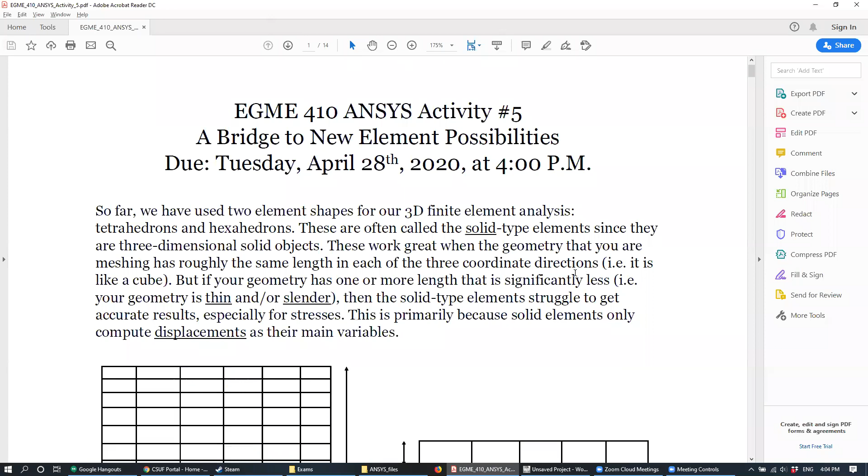Okay, so here's the PDF that's uploaded on Titanium right now. You should be able to download this. I've uploaded a CAD file that we're going to use for the activity today too. So this first part introduces the idea of shell and beam elements, which are the theme for today, and why you would want to use them. And then from there we'll launch into the activity. Okay.

Okay, so let me go over this first part. We talk a lot about the kinds of elements you should use in your finite element analysis. For most of the 3D simulations we've talked about, we've basically only had 2 options: tetrahedrons and hexahedrons. I've drawn those many times, so you know what they look like, and on Tuesday we went over the different properties of each.

One thing I haven't talked about is that these elements both belong to a certain class called solid type elements, because they're basically three-dimensional solid objects. A tetrahedron is a four-sided pyramid, and a hexahedron is just a brick, basically a six-sided box.

These work great for a lot of the cases we've seen, where the geometry has roughly the same length scales in each of the three coordinates. Because these are three-dimensional objects, it helps if your object is also relatively three-dimensional, meaning it has some appreciable length in the X, Y, and Z directions.

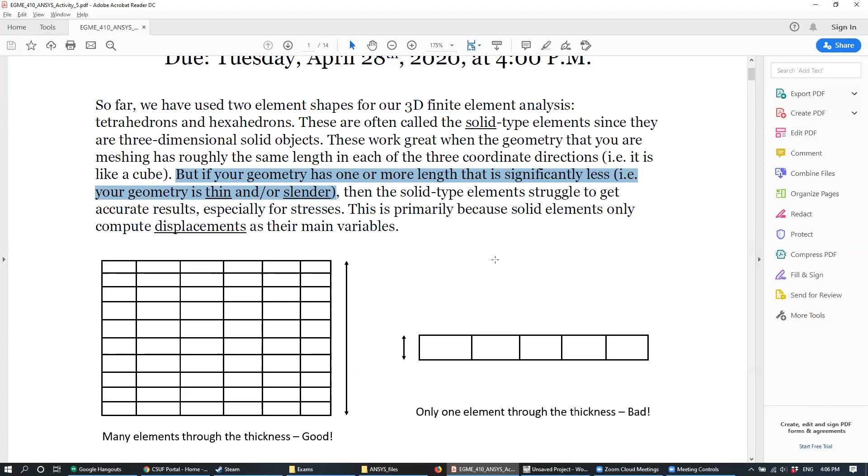If you think of a thin plate, you can think of the width and the height of the plate, but when you look at the thickness, it's actually really, really small compared to the length and the width. So for these kinds of special geometries, which happen quite a lot in our work, solid elements will really struggle.

To give you an example, I have two cases here. On the left, we have a relatively thick member, so it has the same dimensions in both directions. This is a 2D case.

Because of that, we're able to pack a really good mesh density in here. We have about 6 elements across, and then about 10 elements through the thickness. Whenever you have multiple elements through your length, that's always a good thing, because it leads to really accurate results.

But on the right, we have the opposite case where our geometry is really thin. While we're able to get 5 elements across going left to right, going up to down we only have just 1 element thickness there.

This is usually a pretty big indicator, something people look at when reviewing your meshes. If you have parts of your model where you only have 1 element thick, this is usually a bad thing, because it usually leads to some pretty poor accuracy.

The reason for that is, if this represents the extremities of your model, you're basically applying boundary conditions on the upper and bottom surfaces. Even if you don't do it explicitly with a load or constraint, you're doing it implicitly too, because if you don't apply any load or constraint on the top and bottom, it's implicitly assumed those surfaces are stress-free, meaning a pressure value of 0.

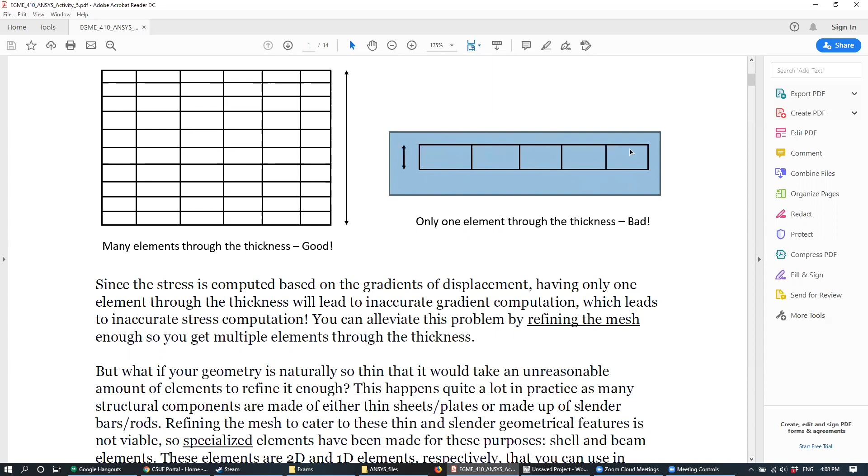So when you have boundary conditions applied on the top and bottom, there's really no room for this to vary or be free. That's why when you only have 1 element through the thickness, this can lead to pretty poor results.

So we know that having only 1 element through the thickness is pretty bad. But a lot of times you can't really help it, because of the geometries you're given in your model, either you use some kind of plate or thin, slender rods. It's so thin that if you try to refine the mesh enough to pack more elements in there, you end up with a mesh that's unreasonably expensive. Especially if you're using the student or academic version of Ansys, you'll quickly run up your element count or node count, and then Ansys won't even try to solve your problem.

So for those of you who are working with these kinds of geometries in your projects and have been struggling to mesh, I've spoken to a few of you, you'll notice it's a big pain to try to deal with these thin and slender geometries.

The good thing is, we're not the first ones to discover this. People have been struggling with this in finite elements for many years. So specialized element types have been created for these purposes, and those element types are shell and beam elements. What's special about these element types is that they're really specialized for these kinds of geometries.

A shell, if you think of like a shell on a snail or something, is something that's really thin, but really wide and really long. So it basically has only 1 dimension that's really thin or small compared to the others. That's essentially going to be a 2D structure. So instead of trying to put a 3D solid element there, we can replace it with a specialized 2D element, which is our shell element. Then the other specialized element type we'll go over are beam elements.

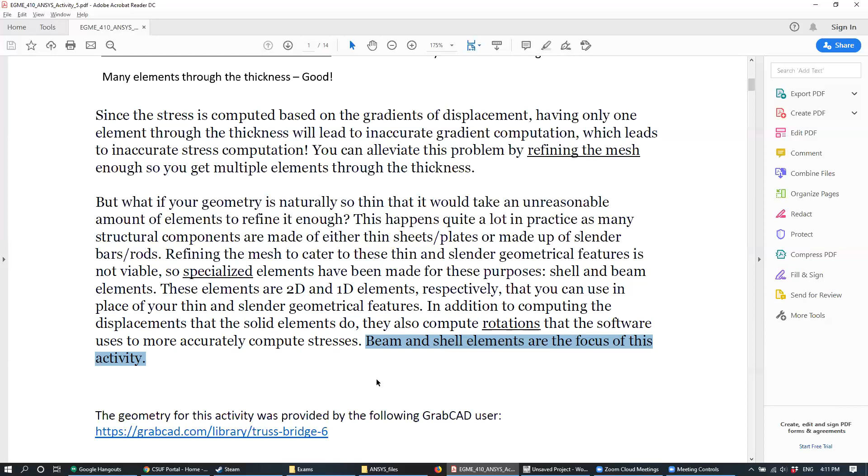So in this activity, what we're going to be doing is learning how to incorporate beam and shell elements in Ansys in order to perform this kind of analysis. And the geometry I picked out, which I've gotten from GrabCAD, I've linked the specific source, is this bridge geometry.

If you notice from this bridge, all the geometrical features here can either be a shell or a beam. So we don't have anything where it's like a solid block of material where all 3 length scales are kind of the same.

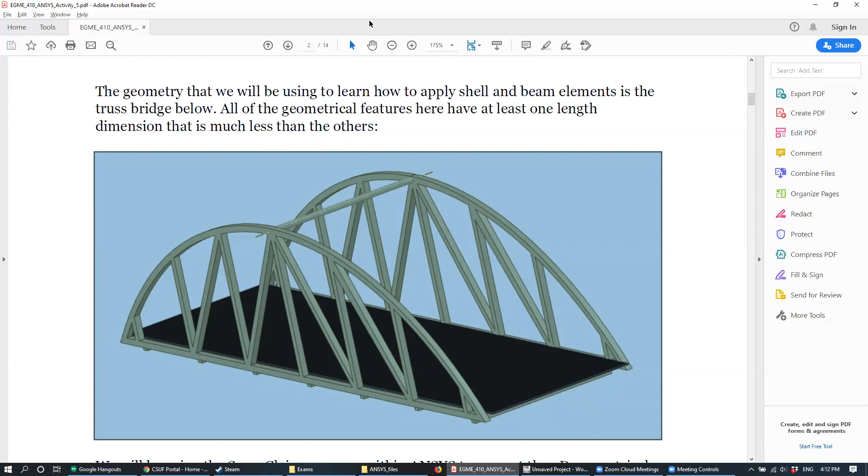For instance, if you look at this rod at the top here, that rod is really long, but it's not really wide and not really high, so we're going to replace that with a beam element. Similarly, if you look at the road, they actually modeled the road in this CAD. This road is basically like a thin plate, really long in this dimension and really wide in that dimension. But if you look at the thickness, in that direction it's really small. So this is the perfect candidate that we can use shell elements for.

So even though I call this an Ansys activity, it's really going to be a SpaceClaim activity because we're going to spend the majority of our time in SpaceClaim.

So what we're going to be doing is learning how to modify 3D geometries within SpaceClaim and replace things with shells and beams.

Okay, so I know I've kind of put some disrespect on SpaceClaim at other times this semester because I didn't know it had these capabilities. So please forgive me, SpaceClaim. You're not as useless as I thought you were. You're actually pretty good for these kinds of things.

Okay, so a summary of the new things we're going to do: first, learn how to open up a geometry in SpaceClaim. Next, learn how to create shells using what's called a midsection operation, which I'll explain when we get to it. Then we'll use an extract operation to get beam geometries from slender segments with constant cross section. Part four, where we'll spend the majority of our time, is learning how to clean up our new geometry in SpaceClaim, which will be quite a process. Finally, in Ansys we'll learn how to make manual connections, which will be important as we fiddle with the geometry.

Oh cool, so Chris says you can create 2D structures in SpaceClaim from internet images. That's pretty cool, I'll have to look into that later on.

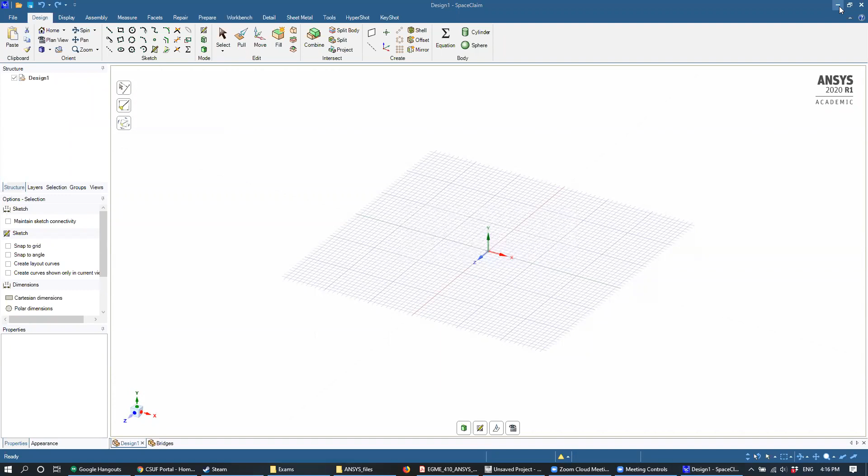Basically we're going to be modifying our geometry in SpaceClaim. Once you've imported it the same way we've always done—right-click geometry from the workbench, import your geometry—the file I've uploaded onto Titanium should be called truss bridge geometry. Once downloaded, import it by right-clicking geometry here, going to import, and browsing for the file wherever you downloaded it. Then right-click that geometry and click the button that says Edit Geometry in SpaceClaim. Before we've edited geometries in Design Modeler, but this time we're going to edit it in SpaceClaim, because SpaceClaim has some really nice features that will allow us to create shell and beam elements.

Okay, so once you've opened up SpaceClaim, you should see something that looks like this. Here's our geometry, which you can examine just as if it were in SolidWorks—I think this was created in SolidWorks first. You can see here we have a typical bridge with the supporting sides of the bridge, the road in black, and all the supporting beams.

So we're going to be using shell and beam operations to basically transform this bridge into something that we can actually analyze. Okay. So the first thing that we're going to do is we're going to basically repair the geometry, right? So luckily for this activity, this geometry is already coming in pretty clean. The person who did this did a pretty good job in making sure everything was filled in and stuff like that. But if you're working with either your own CAD or some CAD that you got somewhere on the internet, you want to make sure that you start with basically as clean a geometry as you can.

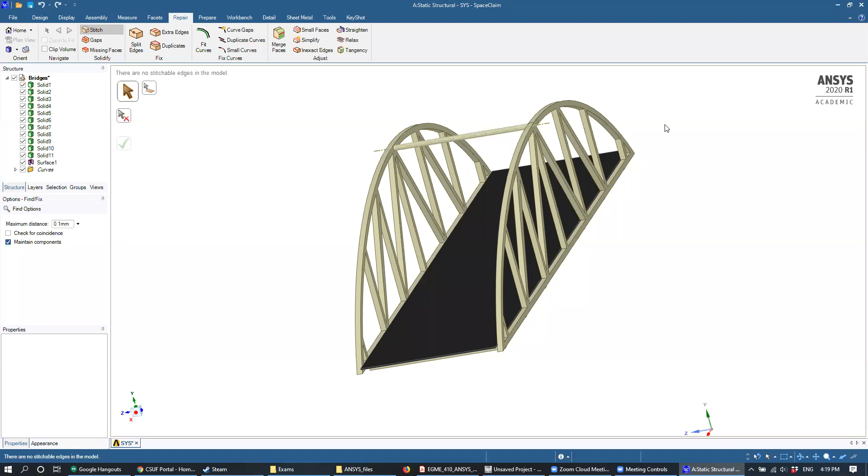Okay. So the top cylinder has a gap between the supporting arcs. Oh, interesting. Did that show up when you did the stitch? Okay. Yeah, we'll fix that later. Small gaps like that we'll fix after we do some beam stuff. But this is more talking about, you know, if you have hollowed out edges and stuff like that.

Oh, I see what you mean. Yeah, there's a small gap right here. Usually that's okay. If you have things that are intersecting with each other, that's what Stitch will look for. Or if you have solids that are hollow, because that'll cause an issue too. But small gaps like this, we'll fix it up later. Yeah, good observation.

Okay. Yeah, SpaceClaim can be a bit slow to load up. So if you're waiting for SpaceClaim, definitely let me know.

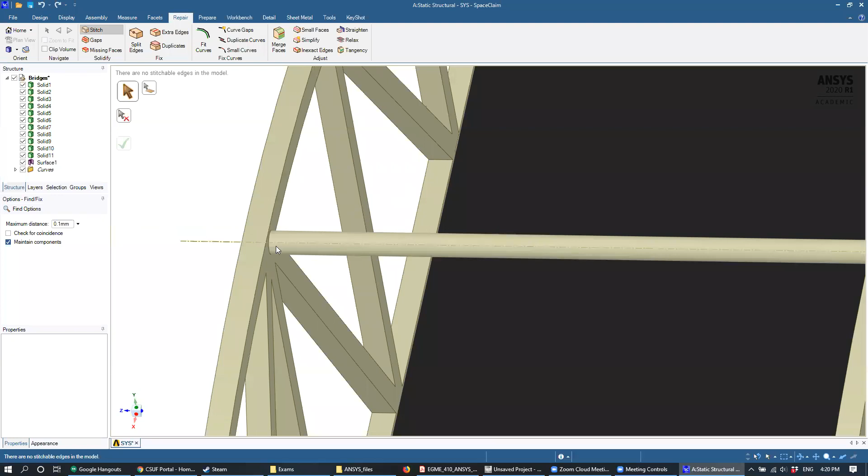Okay. So when you open up SpaceClaim, your geometry is going to be loaded up right here. The first thing that we want to do is make sure that we're starting out with as clean a geometry as we can. SpaceClaim has some nice automatic features that let you do that. So our first step will be going to the Repair tab, which is in the top left here. And then from the Repair tab, you're going to click Stitch.

So Stitch is going to look for any areas where it detects some kind of dubious geometry that's going to cause us problems down the line, mostly with meshing, and then it's going to attempt to automatically correct that. A lot of the cases where Stitch will find issues are if you have two solid parts that are running into each other and overlapping. In those cases, that can cause a lot of issues with meshing, so Stitch will try to clean that up.

And so the next thing that we're going to do is click Gaps right here. Gaps is a similar thing where it tries to detect some kind of inaccuracies in the model. Okay. So in this case, we found something, right? When we click Gaps, we see that we have this small edge right here.

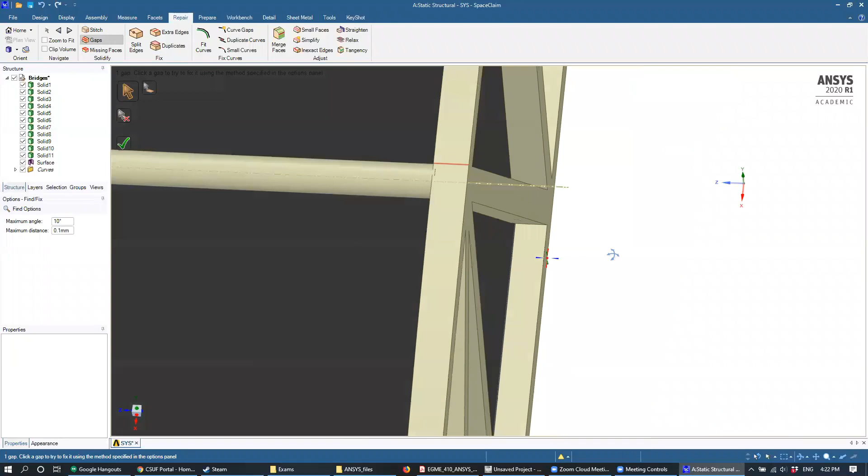So that can be fixed. So then let's go ahead and fix that. To fix anything that the repair tool finds, we can go ahead and click this green check mark here. Okay. So in this case, it says no problem areas were fixed, but that's okay because I know that this geometry will work out.

But normally, when you click this repair tab and you go and click these things, they'll actually go and fix some stuff. But in this case, we're starting out with a pretty clean CAD file, so there's not much for us to do. But in the case that you weren't, these are just some of the automatic tools that SpaceClaim will have to kind of help you out.

Okay. Any questions on this, or are people still kind of catching up a little bit? Okay.

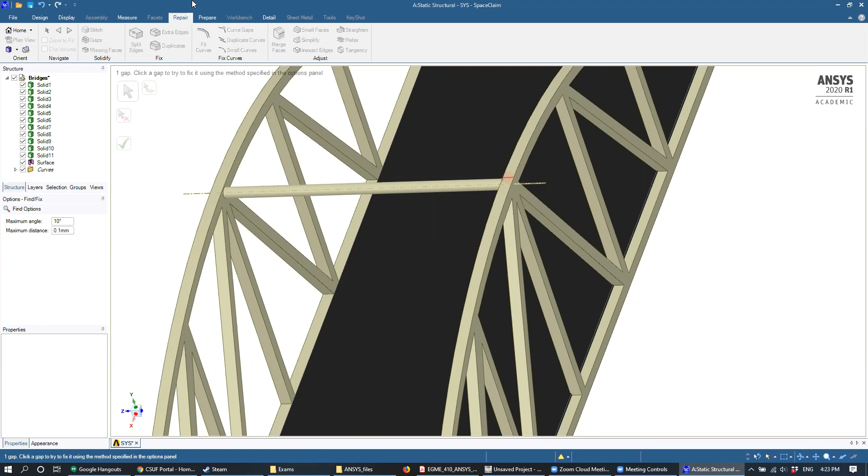So now that we've cleaned up our model, or at least we tried our best to clean up the model, now we can actually start to create our shell elements. To do that, we're going to go to the next tab over, Prepare. Prepare basically gives you a lot of tools for modifying your geometry to make it easier to work with later.

So the first tool that we're going to use is called the midsurface tool. The midsection or mid-surface tool is given by this button right here. After you click Prepare, you can click mid-surface. What this will do is allow you to select places in your model where you want to make shells. Basically any geometry which is relatively thin but has a good length and width, we can turn into a shell.

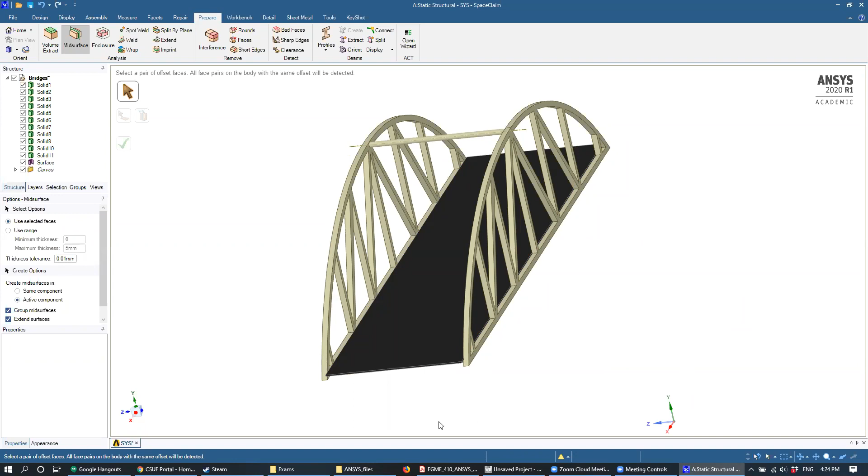So in this particular case, there are three locations where I'm going to create a shell. The first one that's pretty obvious is going to be the road right here. The road is literally a really thin plate, at least the way it's modeled here. So let's turn this road into a shell, because right now this road is technically a three-dimensional object, so you can see it has some thickness, but it's extremely small.

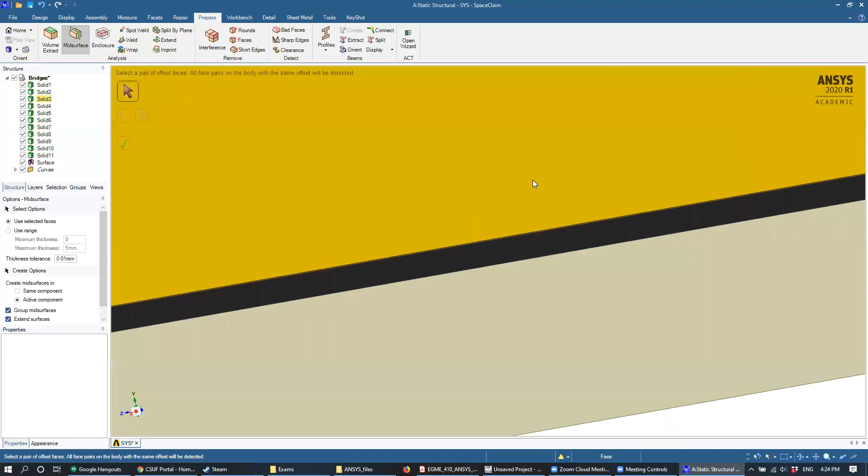So like we talked about before, when you have these three-dimensional objects that are actually really thin, the best thing to do would be to simply replace it with a two-dimensional object. So let's go ahead and do that. After you click mid-surface, you'll see that some surfaces will highlight in yellow when you mouse over them. So let's click the top of the road.

When you click the top of the road, it'll look like nothing happened. But then when you click the road again, what you did was select both sides of the road. You clicked the top of the road first, which selected it and made it invisible. Then you clicked the bottom of the road, which completed the operation.

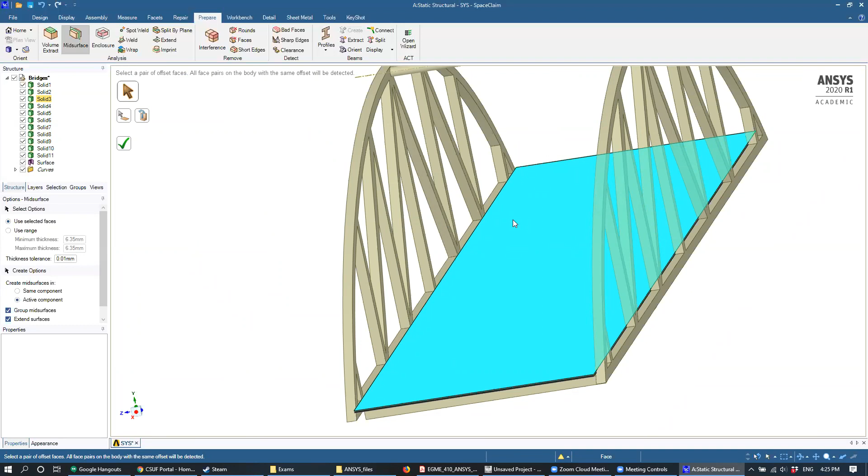What we're telling SpaceClaim here is that these are two planes in our model that are parallel to each other and extremely close. Let's replace these two parallel planes with a shell, because a shell is going to be a lot more convenient. After you've selected the top and the bottom of the road with the mid-surface operation, go ahead and click this green check mark here, and by clicking that, you're going to create your mid-surface.

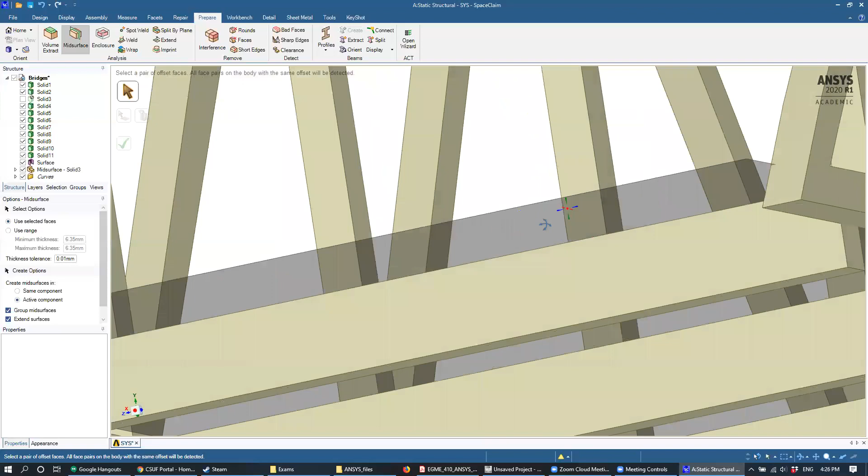After you click the green check mark, you can click anywhere else in your model to deselect it. It's transparent, so it's a little bit hard to see. But we've replaced that black road, which was a three-dimensional object with a tiny bit of thickness, with a two-dimensional object, basically just a rectangle that has no thickness. That's going to be much better for us.

Okay. So was everyone able to create a mid-surface from the road?

Okay, so then now let's continue on with the mid surface, and then let's do it for the sides of the bridge, because these sides of the bridge are also relatively thin, as you can see from right here. So let's go ahead and create mid surfaces there. While we still have the mid surface selected, we're going to click this, and then we're going to click the back side. What you should see is that one side of the bridge will turn blue, and the other side will be green. So let's go ahead and click the check mark.

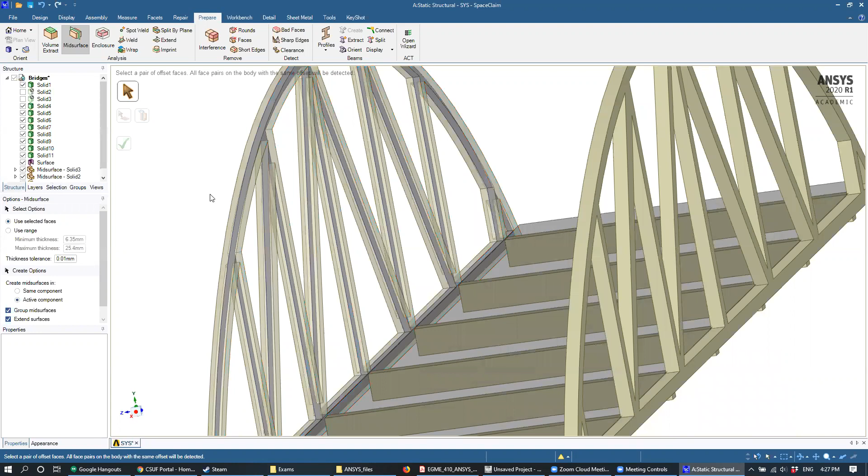Once you click away, you can see that we've replaced the side of the bridge with this mid-surface operation. And then let's do the same for this guy right here. So we'll click once, click twice, green check mark, click away, and you can see now that we've replaced the road and the sides of the bridge with shells. So instead of three-dimensional objects, we replaced them with two-dimensional ones, which have the same shape, but we've eliminated that thinness dimension, which is going to give us trouble later on.

So at this point, you should have three shells in your model, one for the road and one for each of the sides of the bridge. So that's all there is to creating shells. The only requirement for shells is that you have two parallel planes that are next to each other. A lot of your geometries are going to have that kind of feature. So that's for shells.

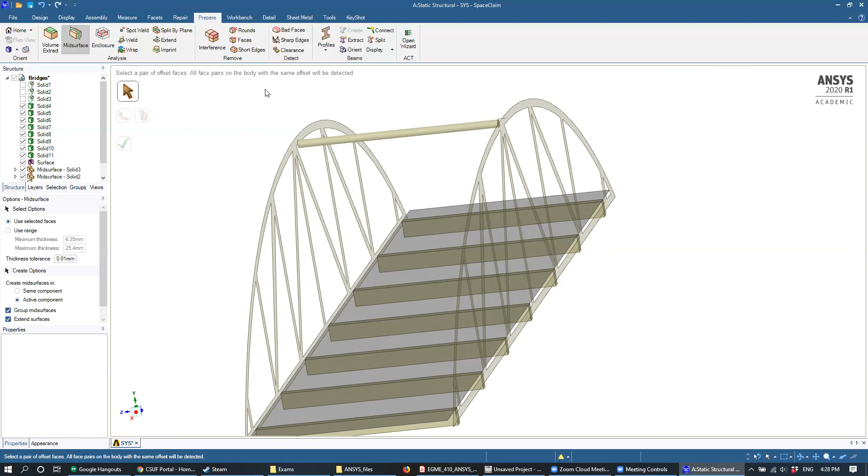So now let's make beams, because we still have some geometries here that we can work on. We have this top beam right here, and we have all these bottom ones. So let's create beams out of these. The tool that we're going to use is this extract feature, still working within the prepare tab. If we go over to the right of the toolbar, this whole section here has to do with beams, but the only tool we're going to use is extract. You can see from the tooltip, extract will create a beam from a solid where the solid has a constant cross section.

So let's click extract right here. Then we're going to mouse over each of these structures and simply left click to create a beam. Let's start with the top here and left click. You can see that solid cylinder has turned into just a one-dimensional line, where that line is our beam. So then let's do that for all the bottom beams too.

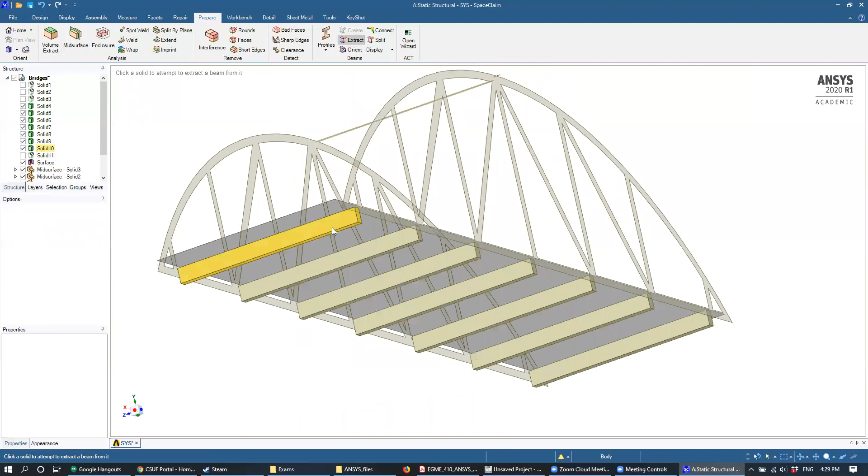All you have to do is make sure you have the extract tool selected, and then click on all of the beams. There should be 8 of them overall: 1 up top, and 7 on the bottom. Let me orient myself. Okay. So we've turned our entire geometries into shells and beams.

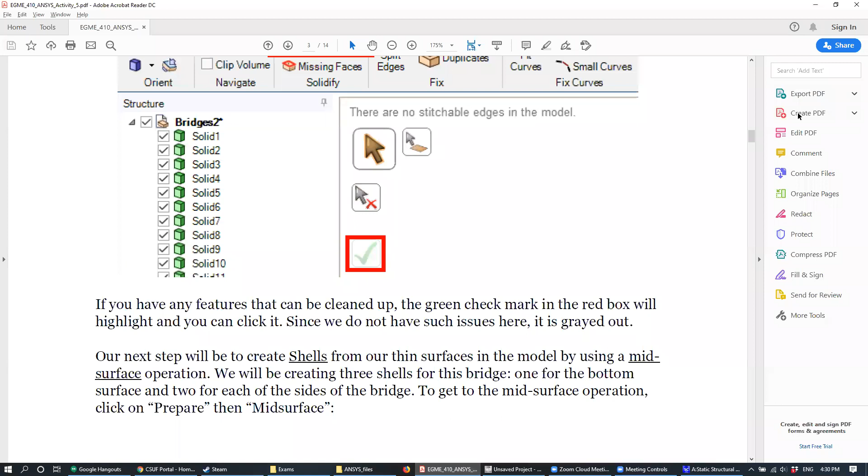So for beams, it's still going to be in the prepare section, just on the right side here. Before we were working on mid surface, and now we're going to work on beams. The button you want is extract right here. Once you click extract, you just click on all the beams in order to create beams out of them.

So now that we've done that, you might think that we're done here, but you would be wrong. We're not done working on this geometry, because if you fly around the model, as people noticed at the beginning, we have some gaps, right? So if we look at this beam right here, let me turn off this guy, not that one, that one.

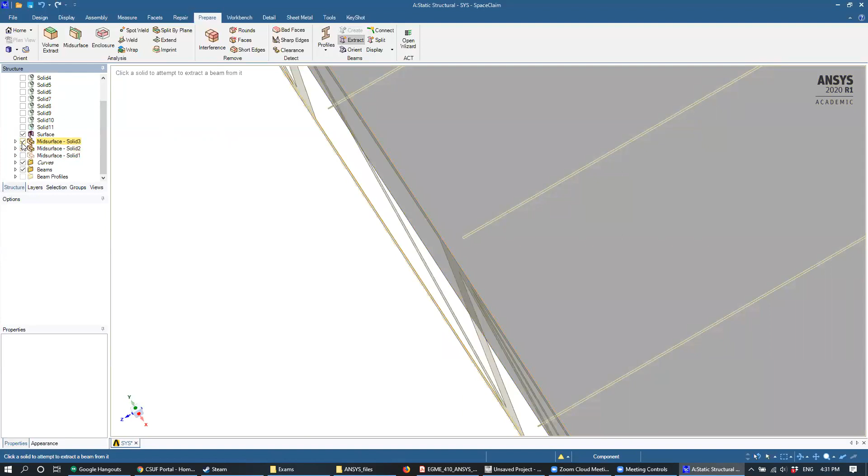So you can hide different parts of your geometry by just clicking the check marks here on the left side. Okay. So you can see right here that this beam is not connected, or there's a gap between this beam and the bridge. So that's going to be a problem because in the three-dimensional geometry, that beam was supposed to be connected there, and it's supposed to help support the bridge from structural failure.

So we need some way to basically connect this beam over to this bridge here. Okay. And you can see that issue kind of persists everywhere in the model, because if you look at the supporting beams on the bottom, like this beam is not connected to the bridge like it should be.

So this happens pretty often when you're creating these shells and beams, because you're replacing a three-dimensional object with a one-dimensional one. There's going to be some gaps that show up just because you're reducing the dimension of some sub features. But not to worry, Ansys SpaceClaim has a tool for this. The tool is called extend. If you read the tooltip here, it says extend will extend surfaces, edges, or sketch curves so that they intersect with bodies.

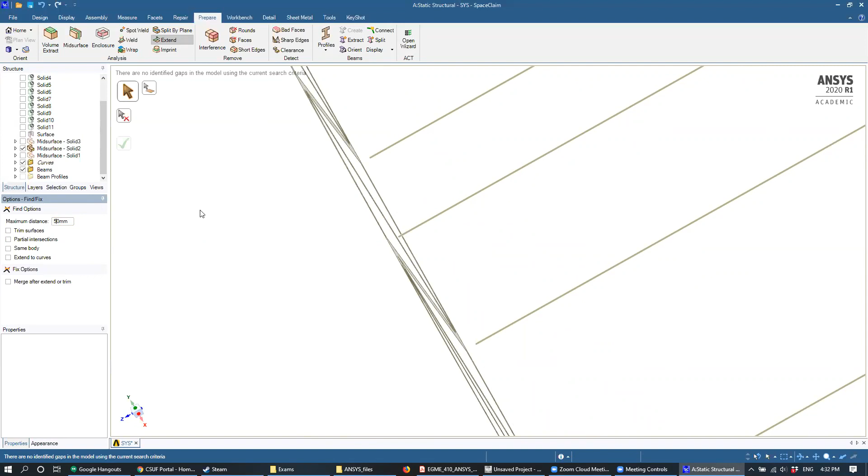So let's go ahead and left click this extend tool. And then what we need to do is raise the tolerance. Because right now it's looking for any gaps that are 10 millimeters or less, and if it can close that gap, it's going to try to do so. But because this is a bridge, it's a fairly big geometry, so we need to up our gap here. So instead of 10 millimeters, let's change it to 50 millimeters. Once you've changed that dimension, you can hit enter.

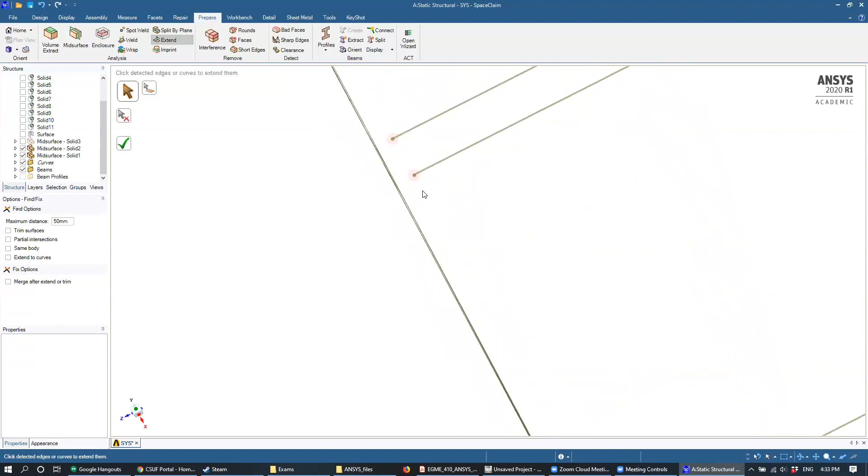Then you should see that SpaceClaim will find places where it can connect. And let's make sure you have both of the bridge sides highlighted. You should find about 8 areas, highlighted in red, where SpaceClaim can connect the beams to the bridge. What SpaceClaim is saying is, hey, I found this curve floating around in no man's land, but if I extend it a little further, it can intersect with something, which is typically what we want. So once you've found the 8 areas indicated at the bottom, click this green check mark to perform the extend operation.

So you can see once we've extended that, this beam is now intersecting with this one. Let's hit the green check mark again, and that's going to connect those beams with the bridge on the left. So now we've extended some of the beams to intersect with the bridge.

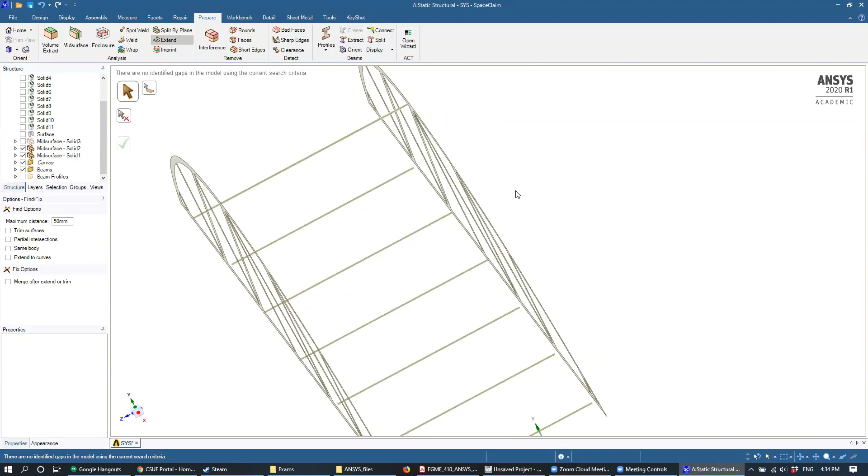Oh, your axis can't spin. Yeah, sometimes it can be really easy to get disoriented here. SpaceClaim is a CAD software, so it's relatively heavy. If it's locked a little bit, maybe give it a little time, and then you can hopefully spin it again. It tends to happen sometimes. And in the worst case, you can always just close the program and start it up again.

Right. Yep. So that's the next thing. Jose brought up a great point. From doing that extend operation, you should only see about half the beams being extended over to the bridge. And if you're having trouble seeing the beams, I basically turned off the road. You can turn the road on and off by clicking this check mark on the left here. My road ended up being solid 3, so I'm going to keep that turned off for now.

So back to Jose's point. Jose noticed that not all the beams were properly connected, right? Even after running the extend operation, we still see a gap right here. And that's not good because we basically can't have any gaps in the model like this.

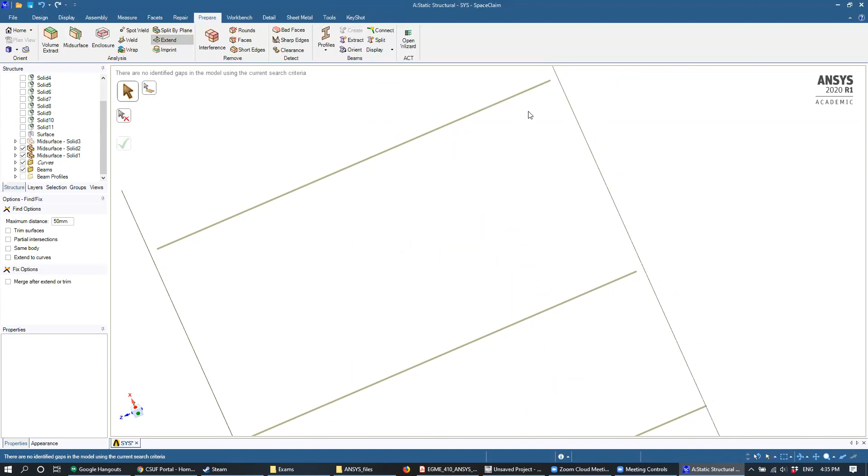And so the reason for this is that these beams are not properly aligned with the bridge. Okay, so let me actually zoom into this view right here. I'm going to basically change the view such that it's centered on the z-axis. And if we zoom in on this beam right here, it's a bit tough to see, but you can see this little gray dot.

So you can see that this gray dot, which represents our beam, is not actually aligned with the bridge. So the extend tool failed because when we extend this, it doesn't actually hit anything. So what we need to do is move this beam up a little bit so that it intersects with this edge. And we need to do that for I think 4 different beams. This part is going to get a little bit tedious, but it's not too bad.

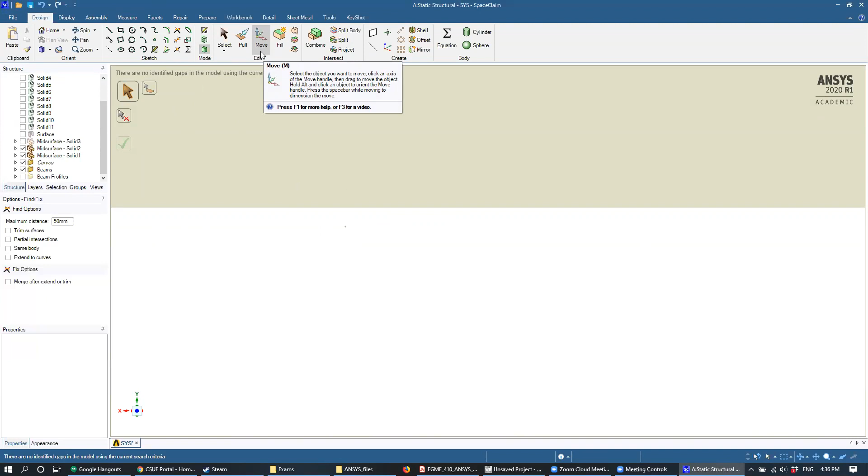So basically what we need to do is move it. We can move certain parts of our geometry from the design tab. If you go to design right here, there will be a move operation that you'll see in the middle here. Once you click this move, you can select certain geometries and drag it up and drag it down, depending on how much you want.

But the problem here is that we don't know how much we want to move it up or down. We can eyeball it as best as we can, but I think the better thing would be to measure it so that we can get a precise number for how much we want to move this up. So in order to get that, we're going to need to use the measure tool. The measure tool is going to be up at the top here. So let's go ahead and click measure. And then we're going to use this measure operator to measure the vertical distance between this beam and this bottom edge.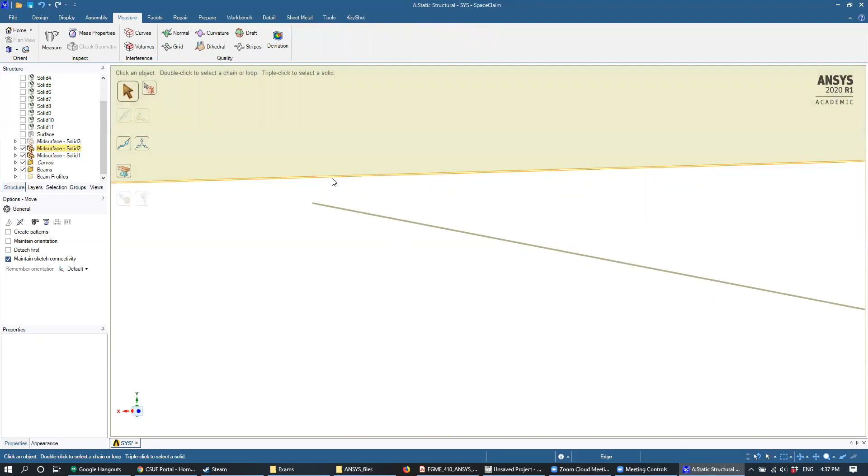So I'll go a bit slow here because it's a lot of operations that we need to do in succession. If you're disoriented from all the zooming and the flying in, it's good to zoom out at this point just to orient yourself. And then we're going to need to focus on just one of the beams. I'm going to focus first on this beam on the edge, where we can see, just by flying around, that this beam is disconnected. So we know that we need to move this beam up so that it can be properly extended.

Right. So Chris's question is: the simplified beams are made by cutting out everything but the center of the cross section, running the complete length. That's correct. So basically, once you click extract, Ansys SpaceClaim looks for something that has a constant cross-sectional area, and replaces that with the line that runs that area. And as a hidden variable, it saves the cross-sectional area just as a number, and some indicator for the shape of the cross section, and it uses that as part of the analysis. But geometrically, it just replaces it with the line that runs the complete length.

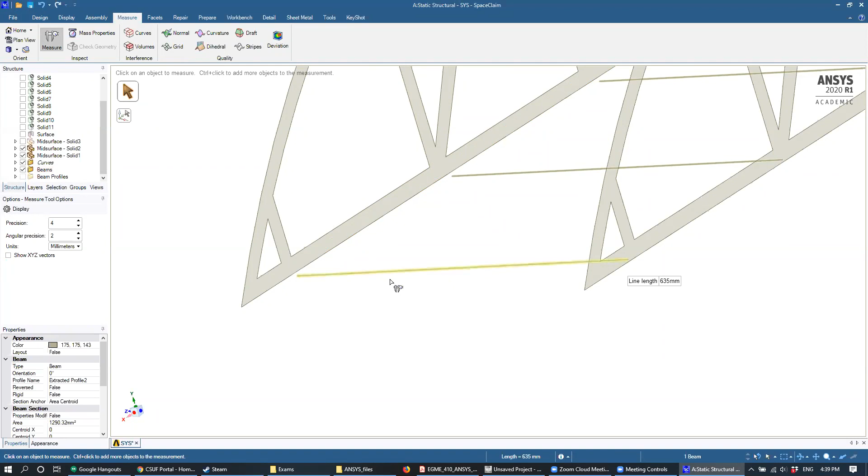Okay, so then let's go and measure this. To measure, we're going to left-click this measure tool right here. This will allow us to measure stuff. If you click measure and then you click the beam, you'll see that the length of the beam is given by 635 millimeters, so that's about 63% of a meter. But what we want is to measure the vertical distance between this beam and the bottom edge of this bridge here.

So you're going to select the beam with your left click, and then hold Control on your keyboard so that you can select multiple objects. Then you're going to left click, and you have to be really precise here, the bottom edge of this bridge right here. What you are seeing right now is the distance between these two. But we don't want just the raw distance, we want the vertical distance. So once you've selected the beam and the bottom edge of the bridge, you're going to go to the left right here and click this option for Show XYZ Vectors.

And then once you do that, you'll be able to see the XYZ distance between these two objects. In this case, what we're looking for is the distance in the Y direction, because the Y direction is the one that's straight up and down here. And we can see that we have a distance of 1.6221 millimeters.

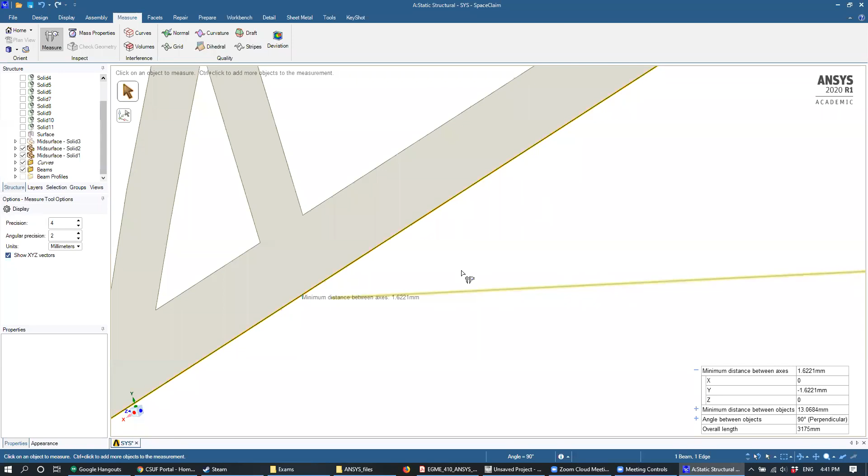So this CAD wasn't as nice as I was talking about earlier. Actually, when I was moving it earlier, I moved it up 0.3 millimeters, so you should have about 1.9221 if you're using the same model or site. That's why we need to use the measure tool, because it's always going to be slightly different.

So now that we have that number in our head, for me that's 1.6221, but for you it might be something different, maybe 1.9. Let's go back to the Design tab. We'll click Design at the top, then click this Move button, which will allow us to move an object.

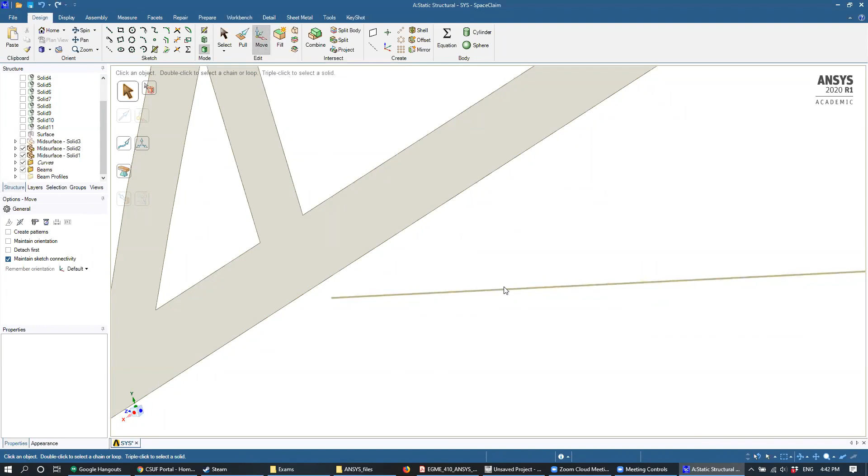Make sure you click some white space to make sure you're not selecting anything else. Once you have the Move tool selected, left click on your beam of choice, and then click the blue arrow to move it up in the Y direction.

What you want to do is move it up just enough so that it intersects with the bridge. You don't want to move it up too much, because that might ruin the point of the beams, which is to rest at the bottom. For me, I know I needed to move it up at least 1.6221, so I'm going to move it up 1.63 millimeters.

Once you've pulled up the blue arrow, you can enter a distance on your keyboard. Once you've entered your distance and hit Enter, you've successfully moved your beam. Go ahead and click on some white space to deselect.

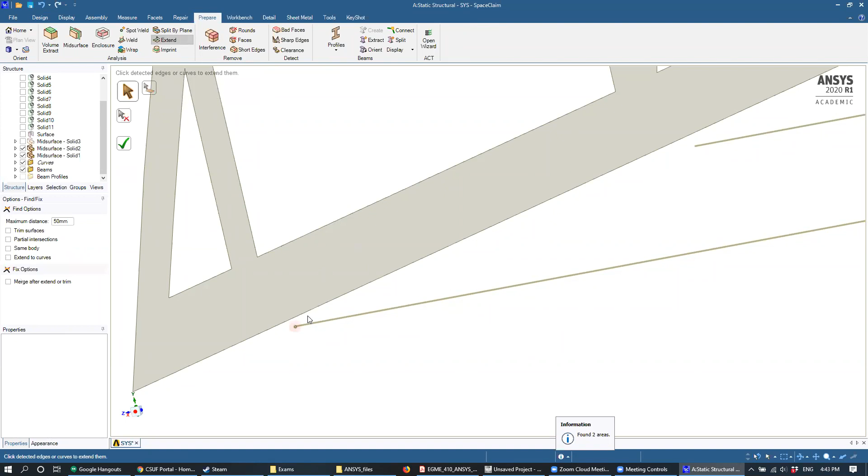Then let's go ahead and run the Extend tool again. Go back to the Prepare tab at the top of Space Claim, and click Extend. If you moved your beam properly within the space of the bridge, you should see that the Extend tool has found two new areas where it can extend a beam to match your bridge, corresponding to the two ends of the beam we just moved. If you run the Extend tool and still don't see these, move your beam up just a tad more.

Once we do that, we can go ahead and click the green check mark, hitting it twice if you have to. Then you can see that this beam is properly intersecting with the bridge, as it should be doing.

I know that was a lot of steps for something that was pretty tedious, so I want to take a second just to catch our breath. So was everyone able to successfully move their beam up and connect it to the bridge?

Okay, all right. Yeah, it's a bit tedious. It's kind of a lot of steps, and a lot of small things, so definitely take your time.

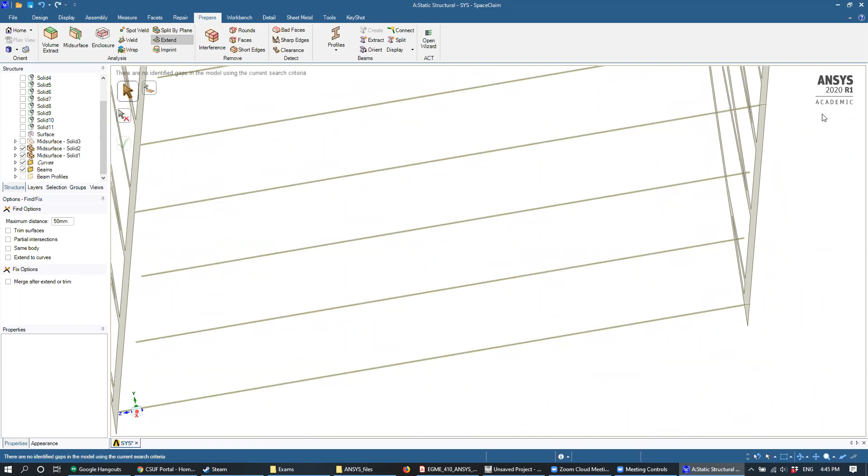Okay, so I'm going to go ahead and do that. I'm going to go a bit faster here, just in the interest of time, but you can kind of see the process from start to finish.

All right, so the first thing is we need to measure. Go ahead and click measure, measure. Click the beam that's not connected, hold Control, and then click the bottom edge right here. So you can see that we have a vertical distance of minus 1.4797, that means I want to move this beam up by 1.48 millimeters.

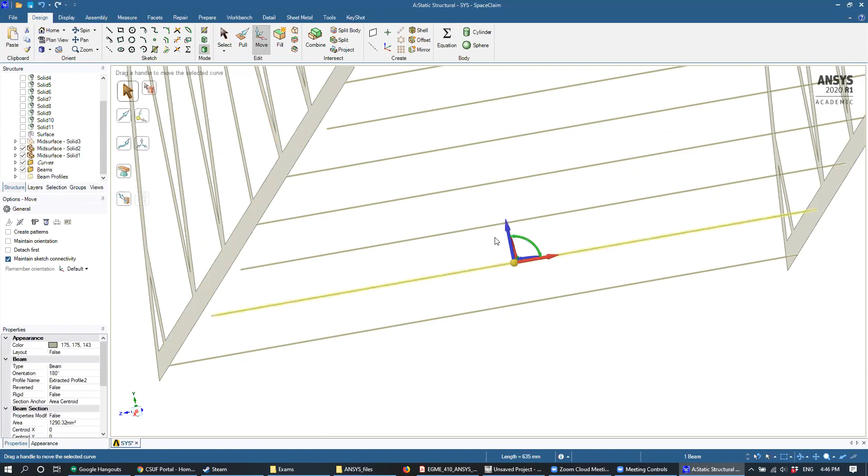Now that I have that number in my head, let's go back to the Design tab and click Move. Let's click the beam and then move it up 1.48, which is just enough to get it within the plane of the bridge. Now that we've performed that move, let's go back to Prepare and hit Extend again, and you can see that we can properly extend this beam to the bridge.

All right, question. Yeah, so I'm moving it up as exactly as I can, but try to be approximate, and get it as close to the distance as you can, because we basically want these beams to line up exactly with this bottom edge. We don't want them floating up in this area right here. Basically what I did was I rounded up to the second decimal place. So whatever distance you measure, round it up to the second decimal, just to make sure that you're overlapping that area, and that should be pretty good.

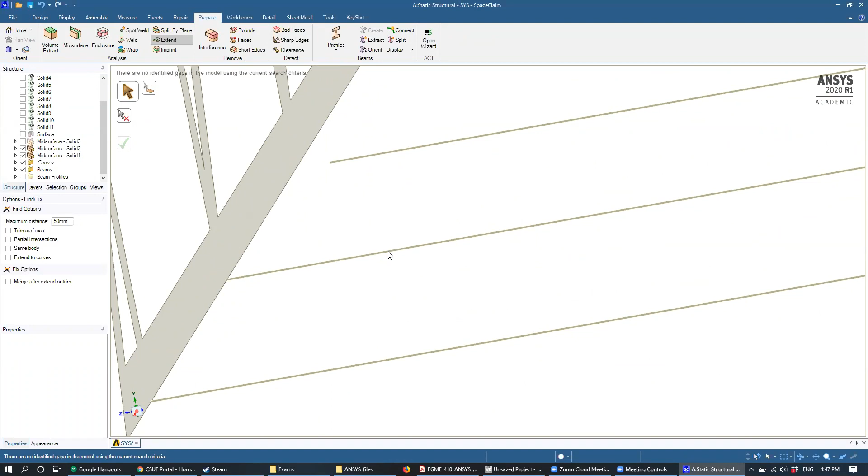Okay, so then now let's do the process for the next beam. Let's hit measure, measure. Let's do this beam and then hold Control and hit the bottom edge right here. So you can see that distance is minus 1.8987 millimeters, so if we move it up by 1.9 millimeters, that will do it.

Now that we have that number in our head, let's go ahead and save that. Go ahead and click Design, then Move, and click this beam right here. Click and drag the blue arrow, and we'll move it up 1.9. Then once we do that, we can hit Extend, and you can see that we can extend this.

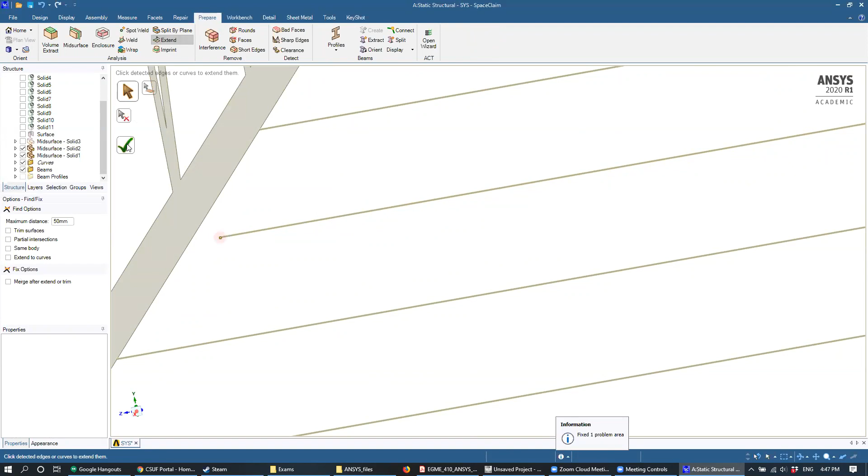And the last one that we need to do is this beam right here. Go ahead and click Measure, Measure. Click this beam, hold Control, hit the bottom edge. You can see this one's pretty close, it's 0.4127 millimeters, so if we move it up just 0.42 millimeters, that should get us good to go. Go ahead and click Design, Move, click this beam, move it up 0.42. Then come back to Prepare, Extend, and you can see that we've extended these just fine.

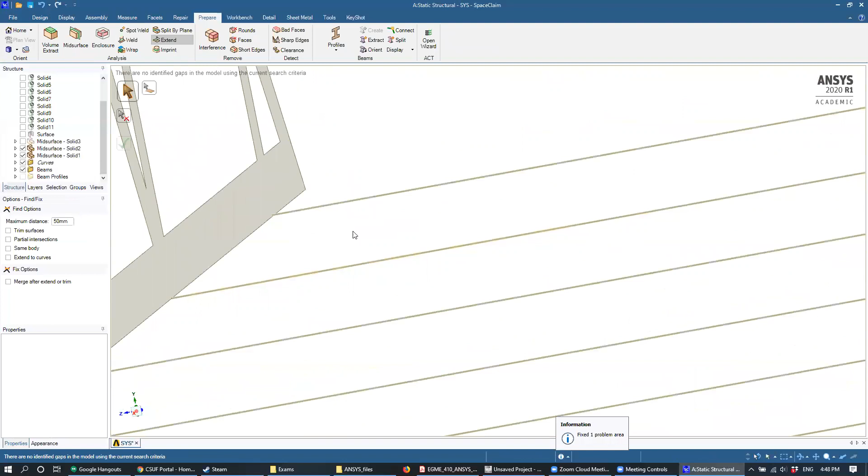So then after you've worked with all the beams, you should see that they're extended pretty well, all of them connecting just as we want. That takes care of all the beams, so they're all properly connected. What that will allow us to do once we jump into Ansys is to form our connections properly. So that takes care of all the beams, but we're not done quite yet because we still have our road.

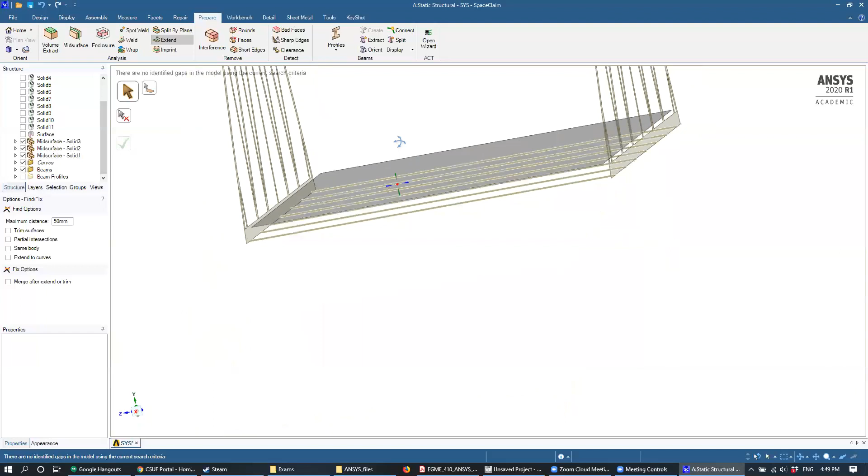So we want to make sure our road is properly connected to our bridge. If you turned off your road's visibility, go ahead and turn it back on by clicking this check mark here for solid 3. So go ahead and look at your road. You can see right now your road is kind of floating just in no man's land, floating a little bit too high, and it's not connected to the left and right sides. So we need to fix this.

The first thing we need to do is basically the same thing we did for the beams: we need to move this road into the correct vertical position so that it aligns well. If we look back at the original geometry, we know that the road is supposed to be resting on these supporting beams right here. So let's move the road down such that it's going to be right on top of these supporting beams. First we need to find out how much we need to move it.

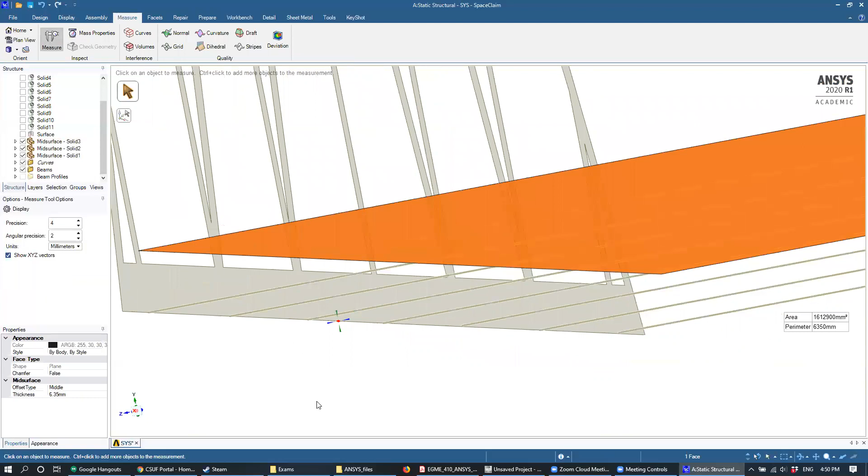So let's go back to the measure tool. Go ahead and hit measure and then measure. Then first let's click the road. You should see it highlight in orange. Same thing we did before, hold down Control and then left click the bottom edge here. You can see that the road is 28.3735 millimeters above where we want it to be.

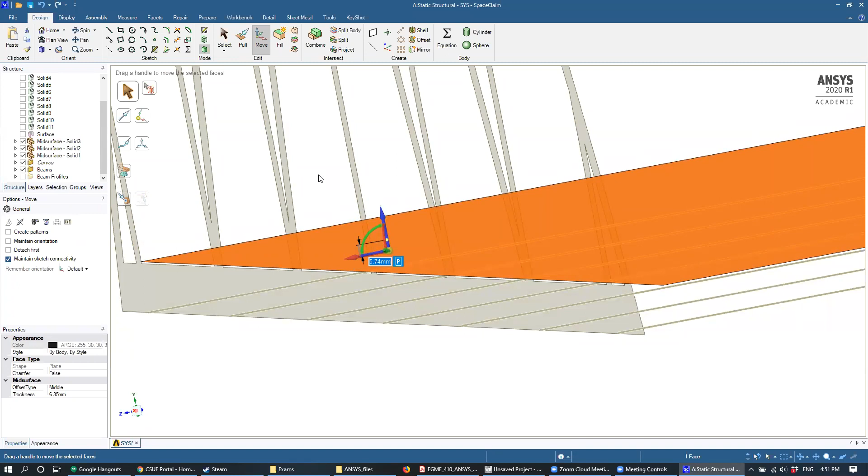So in this case, we're going to move it down. I'm going to round this distance down, so I'm going to move it down 28.37 millimeters. Now that we have that, go ahead and click design, move, click the entire road. Be careful here that you don't click the edge of the road; make sure you actually click the surface. Then let's go ahead and move it down. Once you move it down a little bit, you can enter a number, so I'm going to enter 28.37.

So what that did was it moved the road all the way down there. You can see now that the road is resting on top of the supports, kind of how it should be. And then the last thing we need to do is connect the road over to the sides of the bridge.

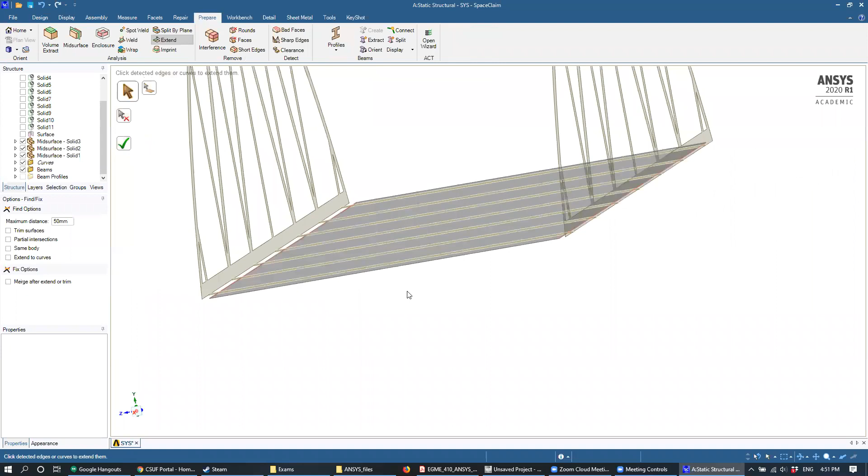So to do that, we can go ahead and hit prepare, and then use our extend tool again. We've been using the extend tool to extend beams, but extend can also extend shells too. Go ahead and click extend, and you can see that it's found 2 extra areas here, which are basically the left and right lateral surfaces of the road. Let me zoom out so you can see it. The extend tool is going to extend the road such that it's going to be overlapping with the bridge.

Same thing as before, let's go ahead and click the left check mark, or green check mark. This time you only have to hit it once, and then the road will be properly extended to the edges of the bridge.

So that was a lot of steps, working with beams and shells. You'll have to spend quite a lot of time working on the geometry. But trust me, all the work will be worth it, because in the end your finite element simulation will run a lot faster and a lot better than it would have done without this.

Later on in this activity, I'm going to ask you to perform this analysis with just regular solid elements. If you can actually get it to run with tetrahedrons and hexes, I'll be pretty impressed, because I couldn't get it to run. But when we do this in terms of shells and beams, simulating this is going to be really simple, because we'll end up with something with not that many elements, but we'll still be able to get accurate results because of the shells and the beams.

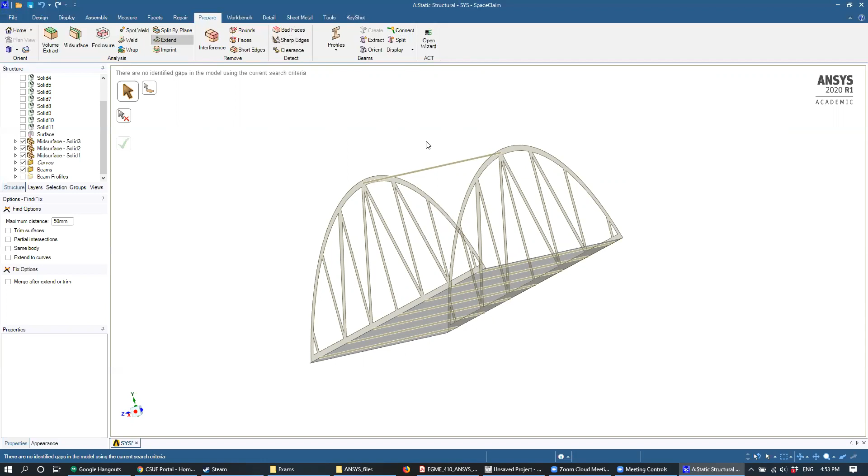I know that it takes a lot, and there's a lot of steps that go into processing it, so I'm recording this lecture right now so you can look back on it to help you prepare your geometry. Are there any questions on this? We're basically done with SpaceClaim, so we're going to be going into Ansys Mechanical after this. But any questions before we do that?

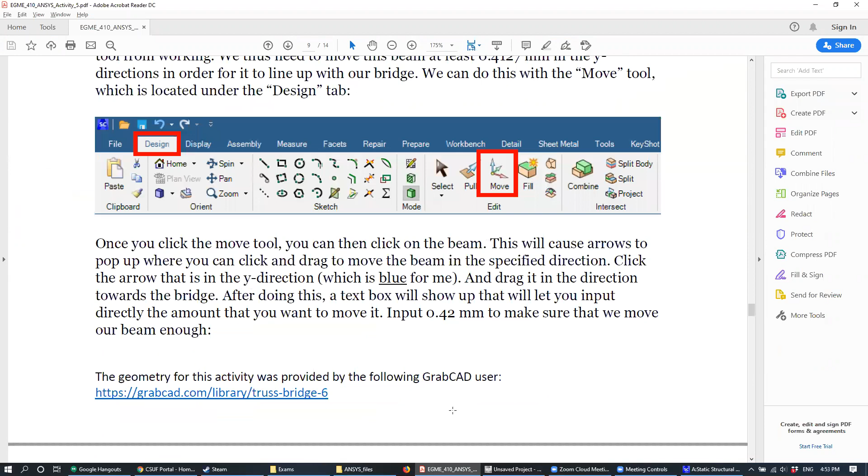Okay. All right, so there's no more questions. Let's go ahead and exit here. Okay.

All right, so the question is, is it possible to add assemblies to SpaceClaim, or is there a certain file type that should be uploaded? So you should be able to do assemblies from SolidWorks, but you can't upload the SolidWorks assembly file. So you have to convert it. Usually an IGES file works pretty well if you're doing SolidWorks parts. So if you save your assembly as an IGES, then you should be able to import that into Ansys. Okay.

All right. So the question is, how much computational time would you estimate that this saves versus 3D everything? It really depends. For this case where you have very thin structures, I would say that it at least reduces it by a factor of 80%. Because if you try to do this with 3D elements, you'll have nodes in the order of 30,000s. I think with this, your node count will be somewhere in the 2,000s or 3,000s or 4,000, 5,000s. Yeah, it's pretty significant.

So it's definitely a lot. I'm not going to shy away from it. It's a lot of work to work on the geometries like this to get it to shells and beams. But all that work is really worth it, especially if your geometry has a lot of these slender structures, because you're usually going to be running fits trying to mesh that thing if you don't do this.

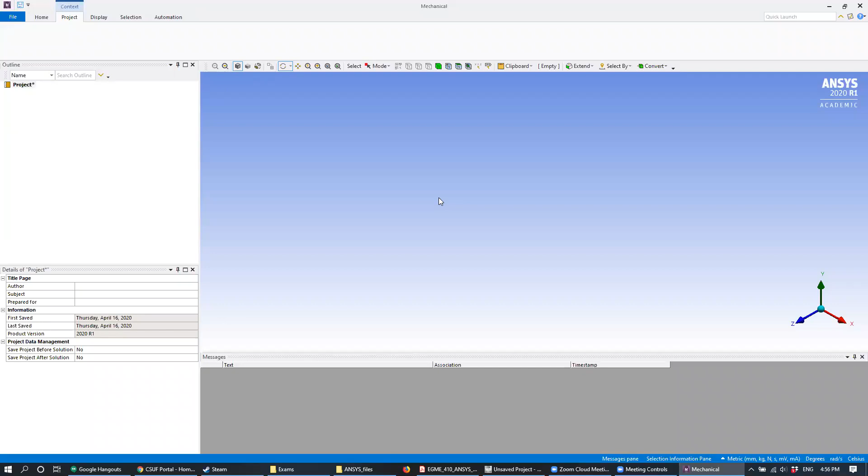So in this case, every single shell and every single beam that we created was a separate entity, a separate part. So basically, we need to define how those parts are going to interact with each other. And since we created all of these shells and beams manually, Ansys doesn't really know what to do with those things yet. So we basically need to tell it how to do that.

Okay. So here we have our model after you open up Ansys Mechanical. Mine opened up relatively quickly, but yours still might be going. But since we have just 15 minutes left, I'm gonna trudge ahead. You guys can catch up when you can.

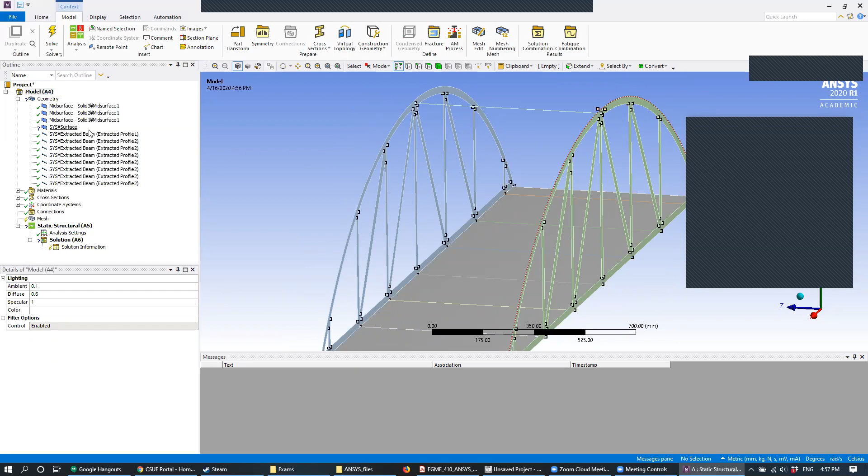Okay. So first thing we'll do is, this is kind of an artifact of grabbing this geometry from GrabCAD, we have this mysterious surface right here. If you remember, this was the part of the model that we couldn't repair. So we don't actually need it in here because it's just an artifact. So let's go ahead and right click this. We can actually delete it, but let's at least just suppress it so that we don't have to see it.

Okay. So you can see right here, we have our shell for the road, our shells for the sides of the bridge, and then all of our beams. Right now, there are no connections here. If you go to the connections tab right here, you can see that there's nothing here, which is not good because we should have some connections between all these different parts. So first thing we're going to need to do is define those connections. Okay.

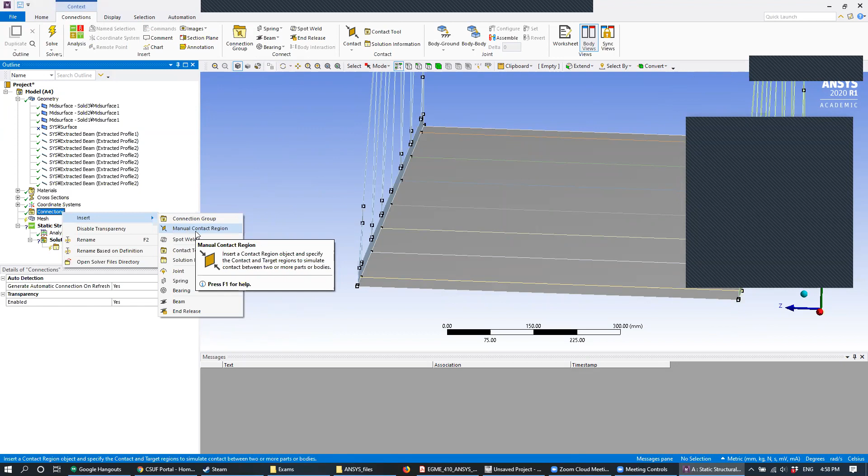So to create a manual connection, so this is the first time we'll be doing this. You're going to right click on Connections, then go to Insert, and then insert a manual contact region. Okay, so let's go ahead and do that. Once you've done that, you're going to come up to a menu right here on the bottom left that'll tell you to define what's called the contact region and then the target region.

So basically we need to connect all of the parts where they need to go. If you look at the PDF, I tell you 3 categories of connections that we need to make. The first thing we need to connect are the ends of the beams to the corresponding side of the bridge. If you zoom in on your geometry here, you should see that at the end of each beam, we have these convenient little white squares that tell us the end.

So what we need to do is connect these points to the surface of the bridge. We need to make one connection for the left side and then another connection for the right side. So let's do the left side first. First, let's select all these little squares right here. This is going to be precision mouse clicking. You're going to left click one of the ends of the beam, that little white square that appears there. It should turn green.

Then you're going to hold Control on your keyboard and click all the other ends of the beam right here. Go slow if you need to. This is not a race. If you don't have the little white squares, see if you can select the ends of the beam. You might have to turn on Vertex Mode right here, because right now it's under Smart Select, which selects just the thing that it sees. With Vertex Mode you can click the end vertices of those beams.

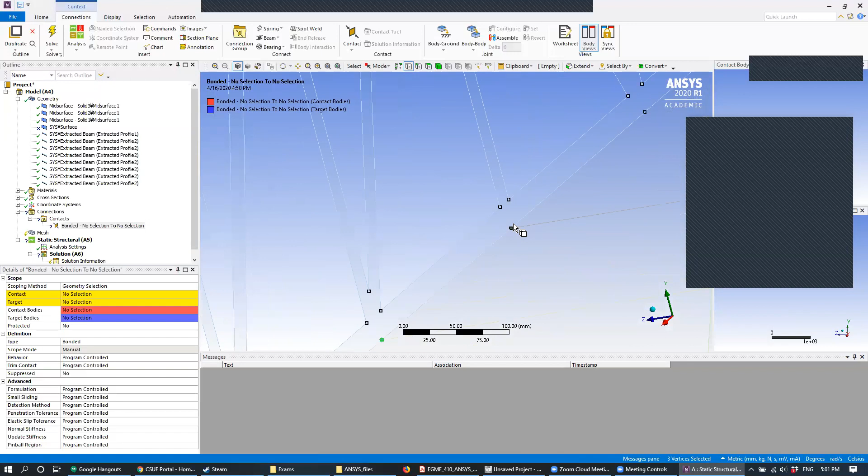This last one here is actually not a beam, that's just the end of the road. So you should be selecting seven of them down here: 1, 2, 3, 4, 5, 6, 7. And then we can't forget our one on the top, so let's click this one on the top. Once you have all 8 of those selected, click Contact and then hit Apply. Then you should see this change: the contact should be 8 vertices here.

Then the target is going to be the thing that we want to bond it to, which is actually the side of the bridge. The side of the bridge is a surface, so let's change this to face mode right here. Now that you're in face mode, select this entire left side of the bridge, and then hit Apply. Okay, let me move the chat.

After you've selected the 8 vertices as the contact and the face as the target, you should see the results of your connection on the right here. On the top screen you can zoom in and out. You should see the 8 vertices of your beams, and in the bottom you should see what you're bonding it to, which is the side of the bridge surface. So that's the left side of the bridge. We need to do the same thing on the right.

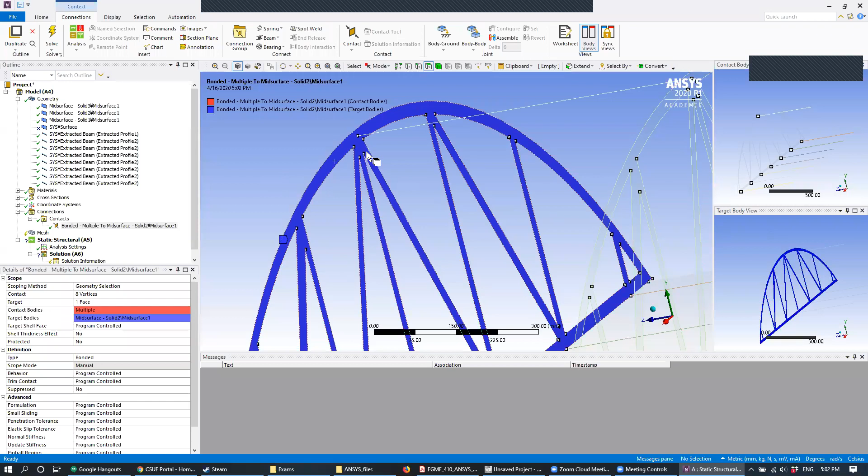So rotate your camera and let's do the same thing, starting down here. We need to create another manual contact region. Right-click Connections, same as before, hit Insert, and insert a manual contact region. Then let's select all the vertices on the other side of the bridge. Make sure you're doing the other side, so you're not selecting the same things for both sides. Let's follow Scott's advice: click Vertex Mode, and then select all these points here.

Okay. And then we'll not forget the one at the top. So let's make sure we have that. So once we've clicked all 8, we can go ahead and hit Apply, and we can see we have 8 vertices there. Okay. Once we have the vertices, we're going to go ahead and change to face select mode, and then click the other side of the bridge. Go ahead and hit Apply.

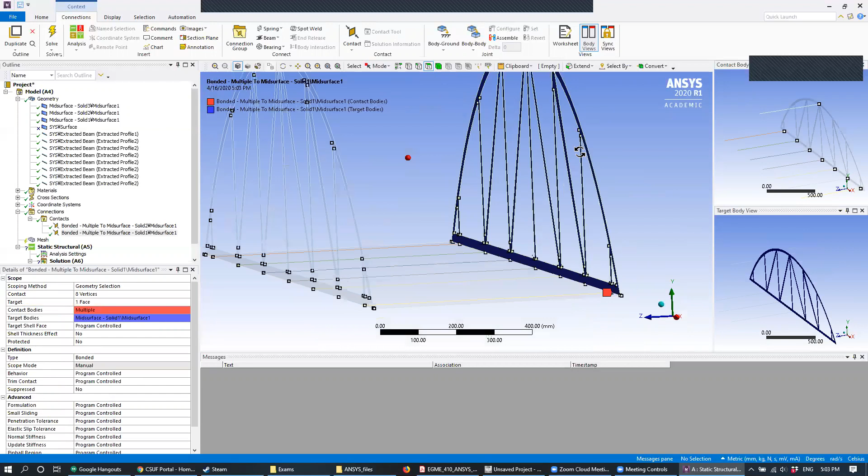Okay. And so with that, all of our beams are going to be connected to the bridge. Okay. So all of our beams are good to go. Any questions on that, creating the manual connections? Okay.

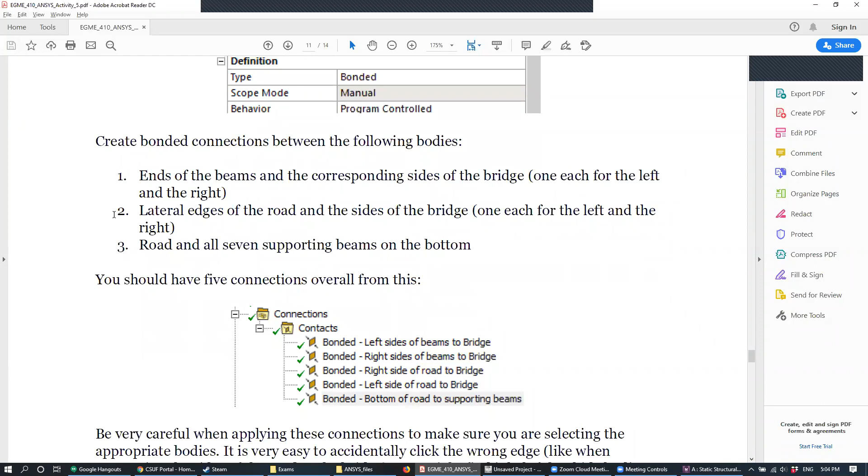So that's the first category of connections that we need to make. So if we go back to the PDF, we can see that the other category of connections that we need to make is we need to connect the lateral edges of the roads to the side of the bridge. Okay? So this one's tricky because what we need to do is we need to connect this edge of the road right here over to this side of the bridge.

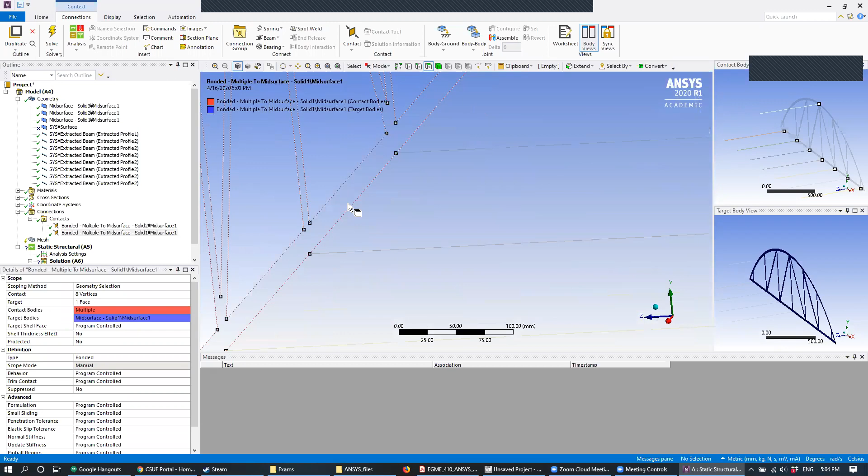Okay. So it's tricky because the sides of this road basically coincide with the edge of the bridge. Okay. So it's very easy to actually select the wrong edge right here. Okay. And so in order to make sure that we select the correct surface, we're going to make use of the hide feature.

Okay. So first, I'm going to bond this left side of the road with the left side of the bridge. So in order to select that edge of the road, I need to hide this part of the bridge just so I can properly select that edge. Okay. So let's go ahead. So now that we know that solid 2 is this side of the bridge right here, let's go ahead and hide it. So to hide a solid, we can right-click this, and we can click on Hide Body. Okay. So that just temporarily hides that body for now, just to make sure that we can select this.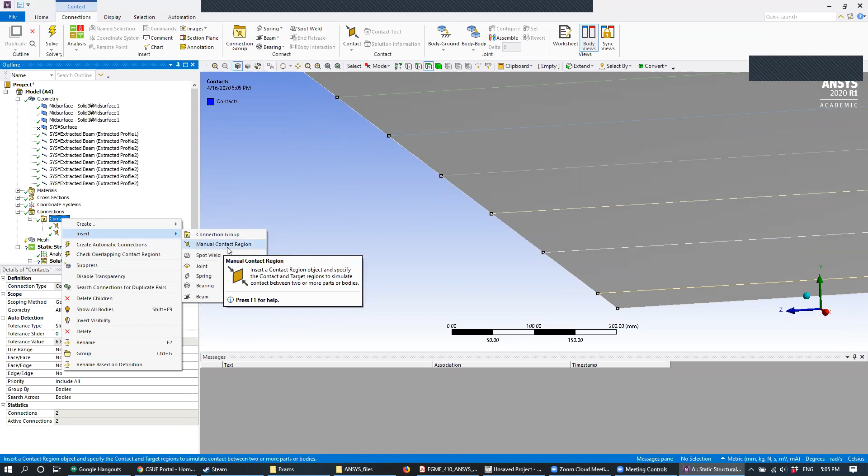Okay. So let's go ahead and create another contact region. So go ahead and right-click Contacts, click Insert, and then click Manual Contact Region, just like we did before. And then we want to select this edge of the bridge right here. So make sure you're on Edge Select mode. So go ahead and hit this, or you can do Control E for the shortcut. Right. So once you do that, go ahead and select this edge right here. And go ahead and click Apply onto that edge. Okay. So now that we've properly selected that edge, now we can properly bond it together with the surface.

So let's go back to our bridge surface and let's unhide it. Okay. So go back to your geometry up here, and then to the body that you've hidden, and you can tell which one it is because the green check mark here is grayed out. Go ahead and click Show Body. Okay. And then once you do that, go back to the contact that you were creating before. So under Contacts, go to Bonded right here, and then we need to set the target for this bond.

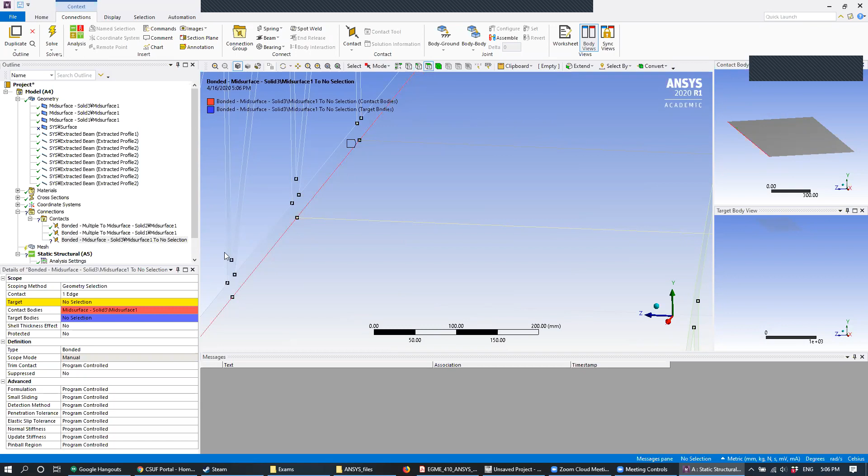Okay. And so our target's going to be the same. It's going to be the entire surface of that bridge. So go ahead and click the face. Make sure you're in Face Select mode. Click the left side of the bridge, and then hit Apply. Okay. And so what we've done is we've bonded the left side of this road to the bridge.

Okay. And then we're going to do the same thing on the right here. So let's do it again. So let's go ahead and right-click this, Insert Manual Contact Region. And then let's take this side of the bridge and let's hide it so that we can properly select that edge. Okay. So now that we've hidden that, make sure you're on Edge Select mode. Click this left side of the bridge right here. Go back to our contact, hit Apply. Okay. So now we've properly selected that edge.

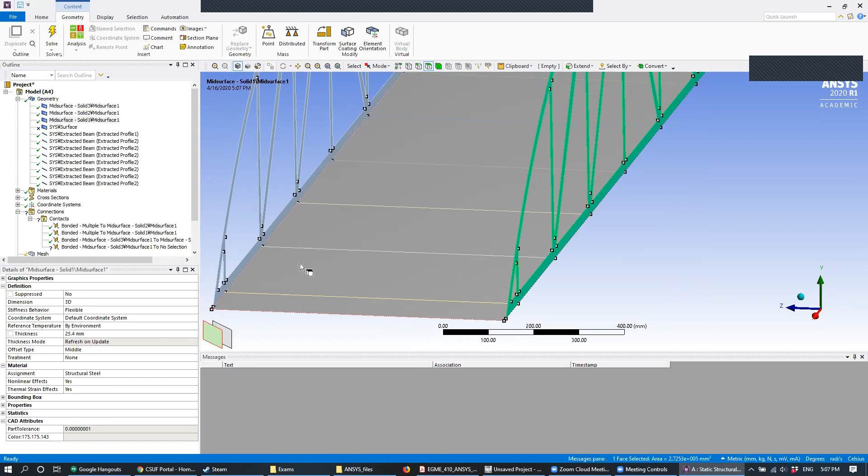So now let's show this surface again. Okay. Make sure we're on Face Select mode. Go and select that face. Go back to here, select the face again, hit Apply. Okay.

So now our road is properly bonded to the bridge. Okay. So you should have 4 contact regions now. You should have 1 contact region for the left side of the bridge and all of the ends of the beam, 1 for the right side of the bridge and all of the ends of the beams. Then you should have 1 contact region for the left side of the road and the left side of the bridge. And then you should have another contact between the right side of the road and the right bridge.

Okay. All right. Any questions on that? Okay.

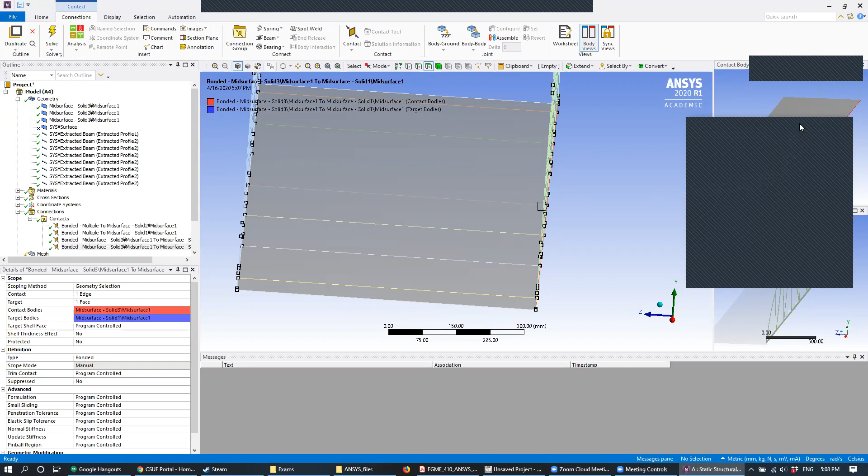So then if we go back to the PDF, we'll see that we have 1 more contact region that we need to do. And that is we need to connect the road to all 7 supporting beams on the bottom. Okay. So this one's relatively simple. We don't need to hide anything. So let's go ahead and right-click Contacts, and then create another manual contact region.

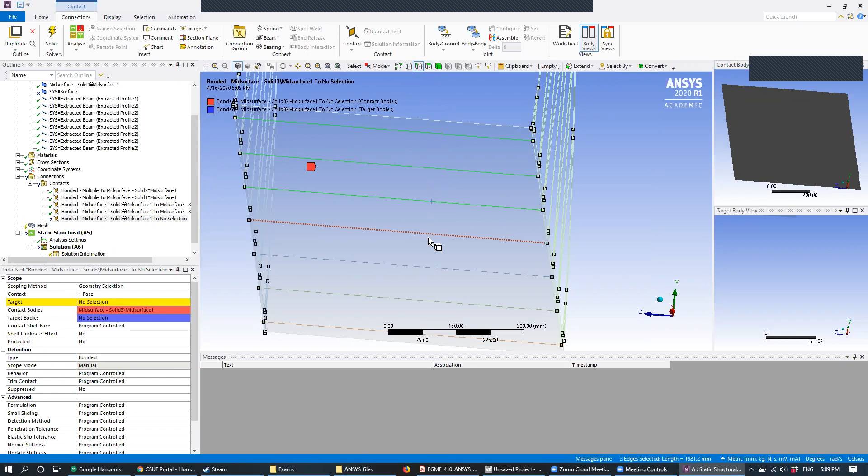And so the first thing that we'll select is the road. So make sure that you're in Face Select mode. Let's go ahead and select the entire road, and then hit Apply. So you can see that we have 1 face there. And then for the beams, make sure you're on Edge Select mode, and then use Control and click to select all the beams on the bottom. So you should have 7 beams. All right. And so you should see that we've created this contact.

But if you did it in this order, what you should see is that you have this question mark here, so it doesn't like this. And so what that means is that we need to reverse the order of this contact. So we need to make the 7 edges or the 7 beams as the contact, and then the target to be the road. I'm actually not sure why this is an issue right here, but it could happen. So if that's the case, you can just reverse it. Go ahead and make your contact equal to the 7 beams there. And then for the target, make that the road.

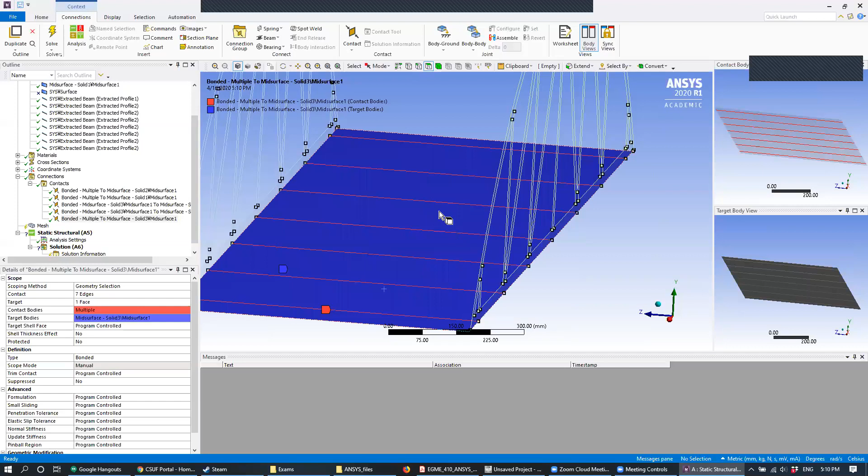All right. And so with that, we have our 5 contact regions that properly bond this structure together. So now all the beams will be connected to everything it should be connected to, and the road should be connected to everything it needs to be connected to. All right. Any questions on that? Okay.

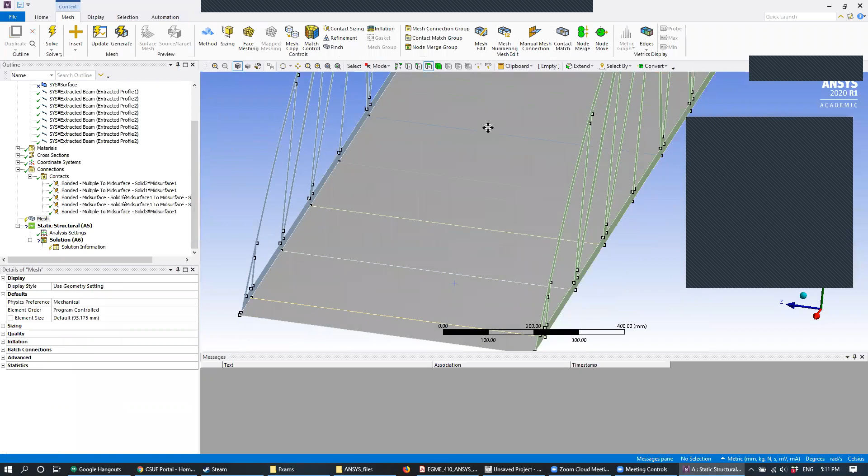And so from here, that's basically all the new stuff that you need to do. Basically, you can mesh this and apply boundary conditions exactly the same way as we've done before. So since we don't have that much time left, I'll just do a basic setup for you. Go ahead and right-click Mesh, and then without inputting any settings, we can click Generate Mesh.

Right. So you should see the mesh being created here. And you can see we have a pretty cheap mesh. We didn't change the element size, but you can see that we have the order of 793 nodes and 600 elements. So it's going to be pretty cheap.

Right. So the question is the process of the height shifts and the extensions shouldn't affect the original moment of inertia. So it will affect it a little bit, but the hope is that when you make these small adjustments, they're so small compared to the total scale of the geometry that it's not going to make a significant effect. So we make small adjustments just to make our simulation work. But that's why I wanted to keep those adjustments as small as we could, to make sure that they don't affect the physics all that much. Yeah.

Okay. So before we go, actually, I want to run a simulation. Right. Yeah, it's a good compromise. I want to show you a shortcut that a lot of you probably have figured out already. If you want to globally change the element size, you don't need to make actual sizing objects. If you left-click Mesh right here, you can just click this element size. You can see the default here is 93.175. So let's refine this and cut it in about half. Let's click 50 millimeters, and click Generate Mesh.

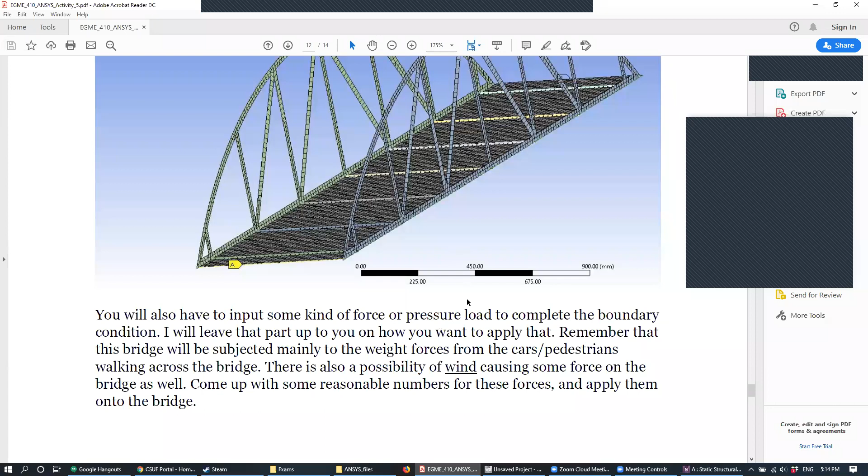Okay. Right, so we've basically run out of time. So you should be able to take it from here for the rest of the activity, because the rest of the activity applies things as we know them before. So I want you to apply the mesh. Oh, 800 nodes, that's good. The less nodes, the better. That means it's going to be cheaper. So problem 3, you're going to apply loads and constraints. That's exactly the same as before. Problem 4, I want you to print out some of your results.

And then problem 5, I want you to attempt to do this with solid elements. So do none of the beam and shell stuff. Basically create a whole new project, don't do anything to geometry, and try to get this to run. And what you'll see is that you might end up very frustrated, just like I was. If you can get it to run with the student version, I'll be pretty impressed, because I could not get it to run.

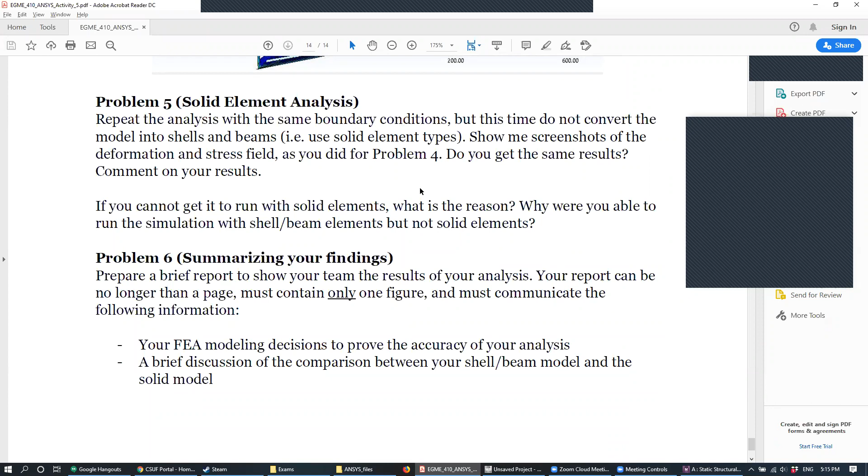Right. Okay, so that's it with this activity. I've included a couple of screenshots of my results so you guys can check. But you guys can go ahead and start working on that. So if you have questions on this, definitely let me know, and then we'll sign off from here. Okay.

Right. So the question is, since this is not a 3D object mesh, would making it a very refined mesh still be computed quickly? If you make a very refined mesh with this, and the element count is still pretty small, it should be computed pretty quickly. The cost is basically determined by how many nodes and how many elements you have. So as long as these are pretty small, you should be able to compute it pretty quickly. Yep.

Okay, so for my model, I picked a global element size of 50 millimeters, and I have 1,761 nodes and 1,225 elements. It might not be exactly the same, but it should be within the same ballpark, within maybe 50 elements here and there. So you should get something pretty close.

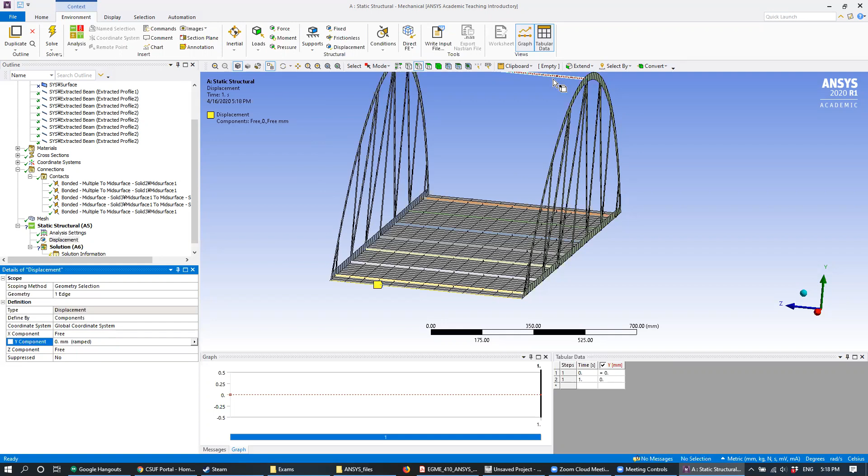Yeah, so if you define by components, mine's by default, but for others it might not be by default. I basically just set this to 0, and that's it. Mm-hmm.